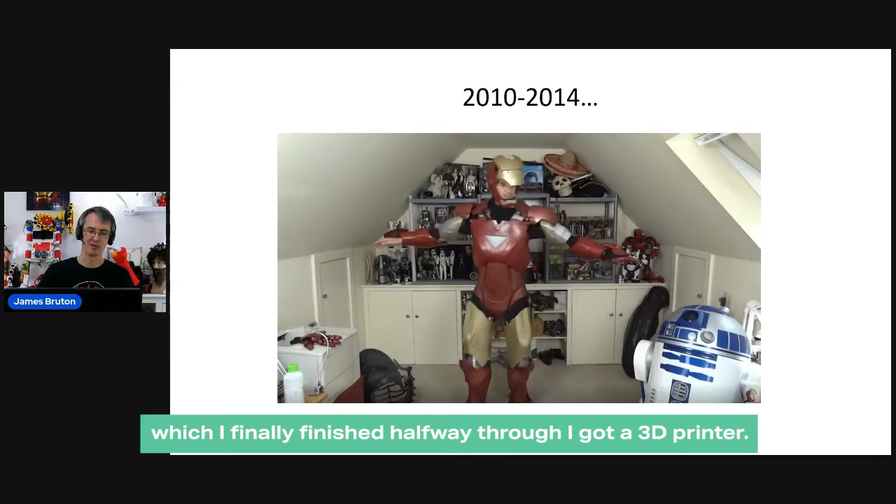That was mainly because I'd stop for 3 months at a time and not get on with it. I basically made one suit, then made molds and casts, and made another suit out of it, which I finally finished. Halfway through, I got a 3D printer. Most of it was a manual process at the start.

That's kind of a big legacy for me. There were around 50 videos building that Iron Man suit, and another 50 for another suit I did. After that, I tried to change the channel and do more serious robotics and stuff like that. I transformed away from pop culture, although I still did quite a lot of robotics and characters from movies.

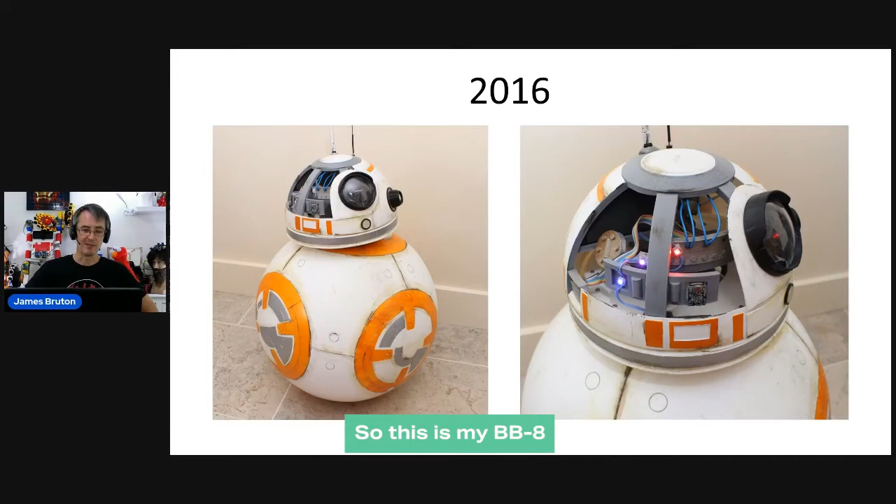Star Wars Episode 7 came out when they really relaunched Star Wars this century, with the character BB-8. This is my BB-8 that I built, and I made the head a cutaway version, the same as the Star Wars Episode 7 visual dictionary. It was functional. I actually did 3 versions, so I kind of saturated YouTube with building BB-8s.

There was an event in 2016 at Excel London called Star Wars Celebration Europe. I think they do it every year, apart from through the pandemic. Last year was Anaheim in California, and I think next year is back in London again. At the 2016 one, they revealed how they made the real BB-8.

In the movie, there were 7 puppets that they control with sticks and various puppeteering rigs. Some were static, some were on motion control rigs. But they also had the real BB-8 that was rolled out at Star Wars Celebration the year before, where they rolled it out on stage and everyone thought it was magic - the red carpet droid that they took to all the red carpet events.

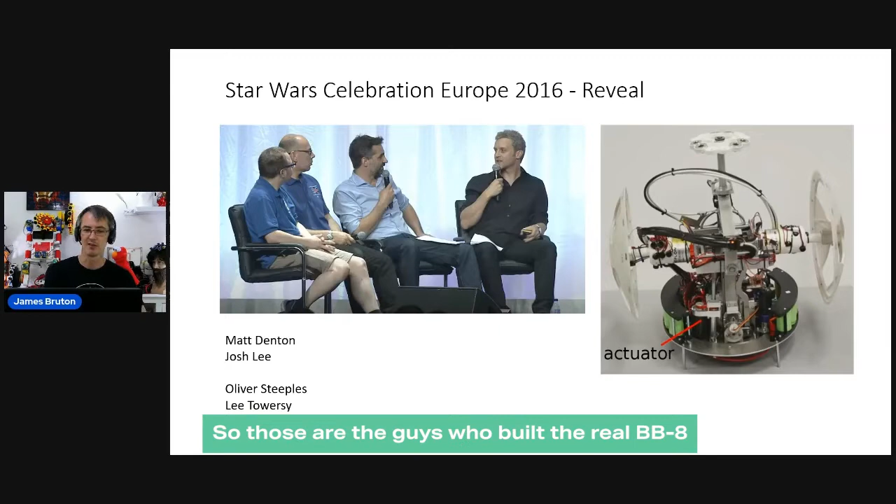The guys on stage on the left are Oliver and Lee, who were originally R2D2 Builders Club members, a fan club. They got asked to actually go and work on Star Wars Episode 7, building the real R2D2. The guys on the right are Matt Denton and Josh Lee from Pinewood Creature Effects - those are the guys who built the real BB-8 that rolled out on stage. At that event in 2016, they revealed how they did it and showed the internals for it.

At that event, I had my BB-8 actually functioning, so that was the only one that actually worked at that event. I was pretty happy that I had it working. This is my BB-8. I didn't have quite the budget that Pinewood had - they had a lot more money than me, being on a Star Wars production.

My main motors cost £2 each, and they were basically windscreen wiper motors that I got off eBay. There's a big piece of lead in the bottom, so it is passively stable. It's got an inertial measurement unit, which it's trying desperately to keep itself upright. It's a 6-axis machine, and it's basically reading the angle it's at and adjusting the motor speeds and positions about 50 times a second to try and stay upright.

So it can rotate on the spot, and it can drive forwards and backwards and lean sideways to steer. It's effectively running on what would be a virtual axle. The head inside is on another lever that moves in another 3 axes. So that's my BB-8. After that, I moved on to some other more serious robotics.

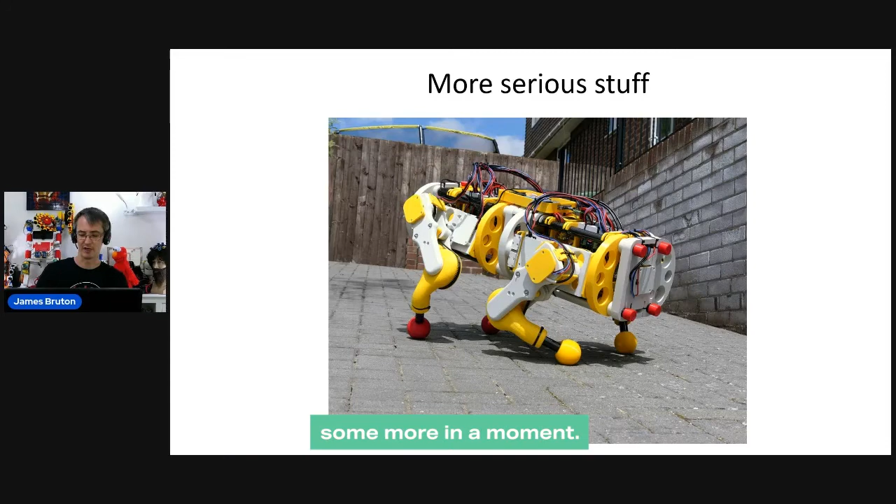I tend to do these themes on projects and then thrash them until I've done them as much as I can. So I did 3 or 4 BB-8s - I'll mention the 4th one in a moment. I also did a lot of robot dog projects - this is Open Dog 2, and I'm going to talk about that some more in a moment. I also spent a year in my spare time learning ROS, the Robot Operating System, which is an open source framework, and this is one of the robots I built.

I did all the hardware, all the microcontroller code to read the wheel encoders and work out the pose of the robot, and worked out how to send those messages as ROS topics and how to use the navigation stack. So it can drive around. It's got a LiDAR on the front, and it can do mapping and navigation.

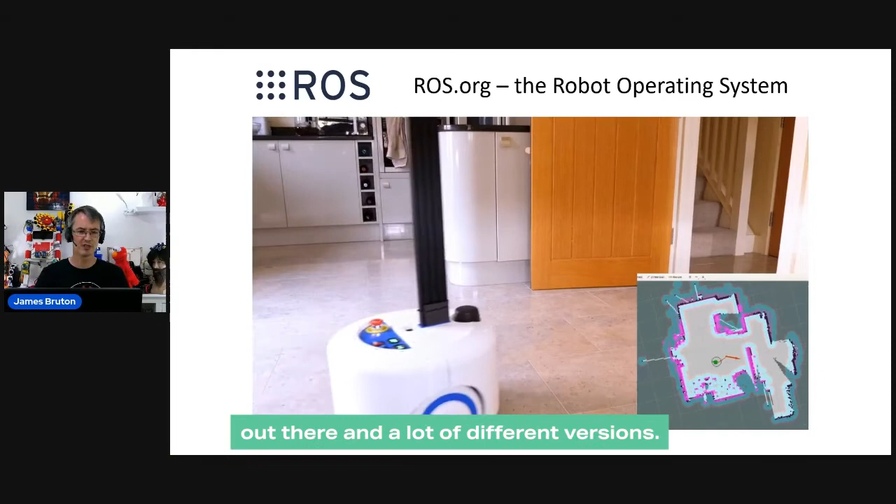This is just running ROS. I didn't actually write much software apart from the microcontroller code, but trying to configure ROS, there's a lot of documentation out there and a lot of different versions. So I ended up buying another ROS robot and looking at various examples.

But nonetheless, it was me trying to get away from dressing up as Iron Man. I mean, ultimately, I don't want to dress up as Iron Man till I'm 65 and retired. Robert Downey Jr. has done all right, but...

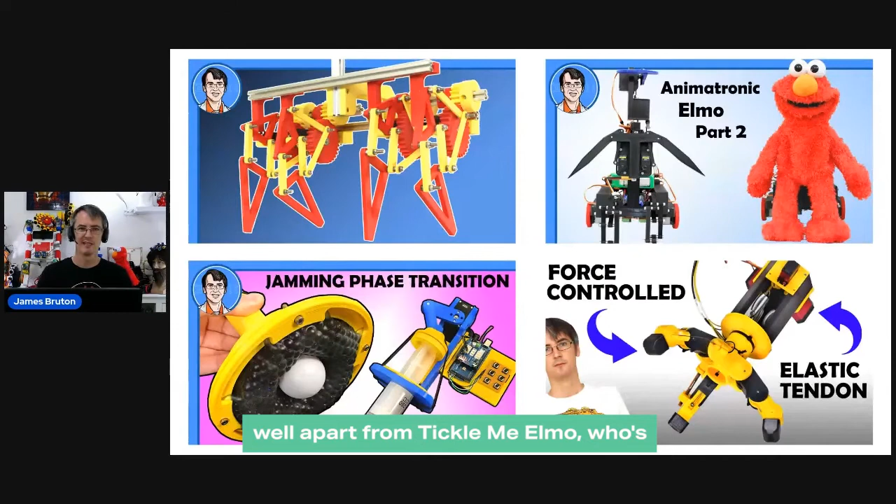I thought I'd move on to some more serious stuff that I was capable of. In 2020, I pretty much didn't do any pop culture, well, apart from Tickle Me Elmo, who's peering over my shoulder. Most of it was serious robotics, so things like force-controlled elastic tendons. The top left is a dynamically balancing Strandbeest, and various other projects.

And this is quite relevant in trying to transform the channel, and I'm going to talk a bit more about that in a moment. The only reason I would do pop culture is if a big brand came along and said, we need a droid from Star Wars, please.

So this is Colin Furze, who's got I think 11 million subscribers now, who builds crazy machines and stuff with lots of fire in. eBay asked us to do a Star Wars promo, and they licensed Star Wars Episode 8 from Disney.

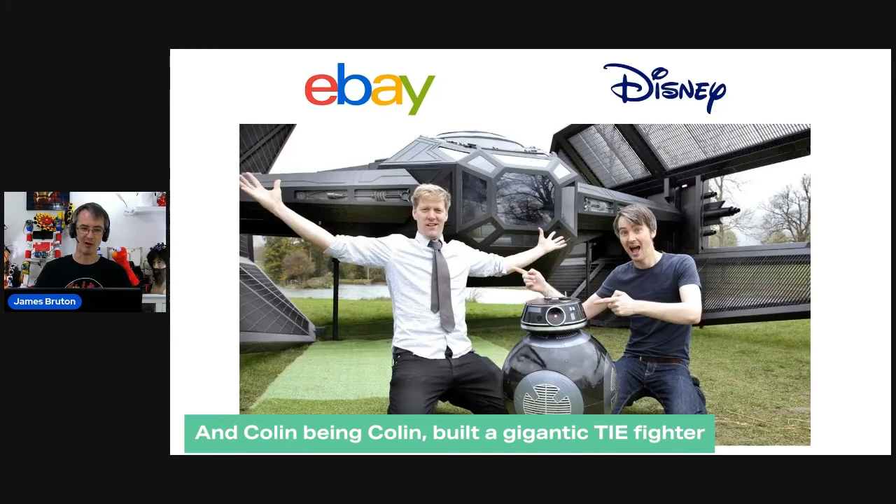So I built another droid, which was BB-9E, which was like the bad BB-8 that's in Star Wars Episode 8. And Colin, being Colin, built a gigantic TIE fighter, which is behind us, out of steel. And that's Kylo Ren's TIE silencer. It didn't fly, but it would have been cool if it did.

Anyway, it's a big production with a catering truck and four camera guys and a drone operator and health and safety and the CEO of eBay UK and Disney licensing on site. Some kids, they surprised some kids basically. Oh, official Disney stormtroopers, the whole thing.

There's quite a good, it was a Christmas video. It was quite a good feel.

Then it happens again for Marvel Infinity War. So here's me and Colin again with a box. And then inside the box was a giant Hulkbuster that broke out with a pneumatic punching fist.

My job was designing the cosmetics to make it look like that. It all had to be rolled out of steel, which can only be rolled in one axis. At least that's all Colin could do. And it still had to be approved by Marvel in the US.

So I had to do all the CAD for that and work out how to unfold it onto flat sheets. And I 3D printed the helmet and did all the electronics and control, which had to be risk assessed because it had fire coming out of it, which meant it all had to be operated on a 30-meter cable and no one was allowed near it.

Then Paramount asked me to build Bumblebee, the real Transformer. This one I did on my own, but I had to employ someone to help me, and we built the car as well. So this is a life-size Beetle replica.

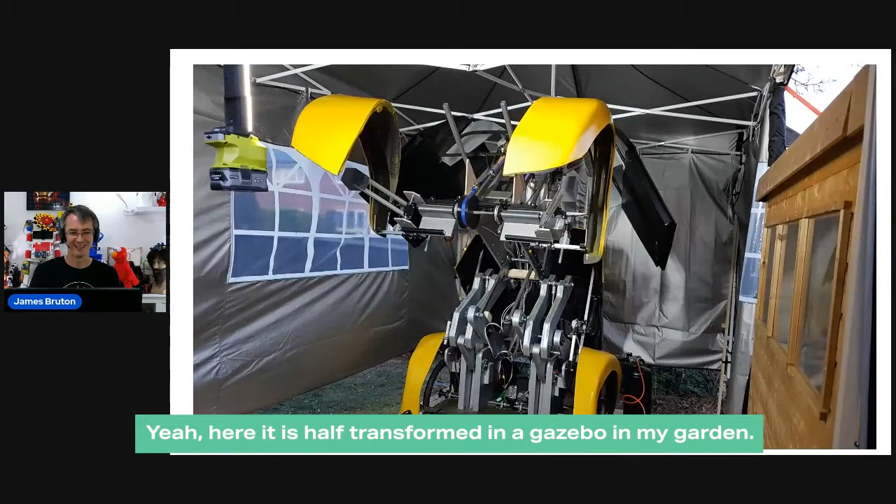Yeah, here it is half transformed in a gazebo in my garden. And here is the thing transformed.

And we basically set up a shoot in a garage where some customers came in for a free tyre check. And then we transformed this thing in front of them. Most of the British public are really bad at reactions.

There was one guy who saved the day who was like a bit crazy. If it had been in America, it would have been fine.

So some parents brought their kids in as well, and then they tried to interview them afterwards, sort of like, was it exciting? Yes. What did you think of it? Very nice. So anyway, the video was okay in the end.

Then we shot our own video pranking a fake traffic warden, which is quite good. You can check that out on my channel.

But most of the time, I tried to do serious robotics and not pop culture unless someone had a budget. So on that note, I'm going to tell you why I deleted 100 million views from my YouTube channel. So you'd think videos with tens of millions of views on are a good thing.

But I kind of changed what I did. The problem I had was what some people described as a good problem to have.

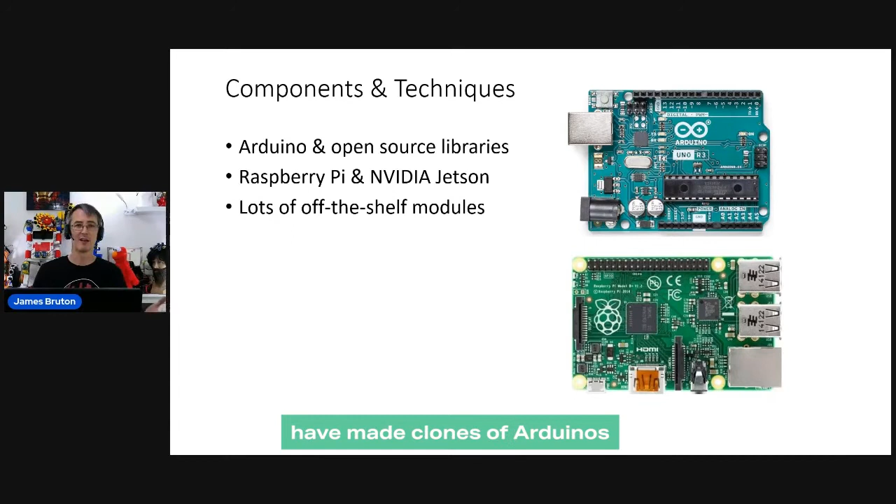There are lots of modules and lots of libraries. The whole Arduino ecosystem is really good because lots of people have made clones of Arduinos, and they've made loads of clones of modules. There's loads of cheap stuff you can get on eBay from China, and there's pretty much always an easy way to interface it. So most of my code is reading from one library, maybe even processing it with another library, and then pumping it out to some other physical module that uses another library.

So I don't really have to be very good at software development to make things like balancing robots and transformers that can transform and all that good stuff. I do make physical things, so I do a lot of 3D printing.

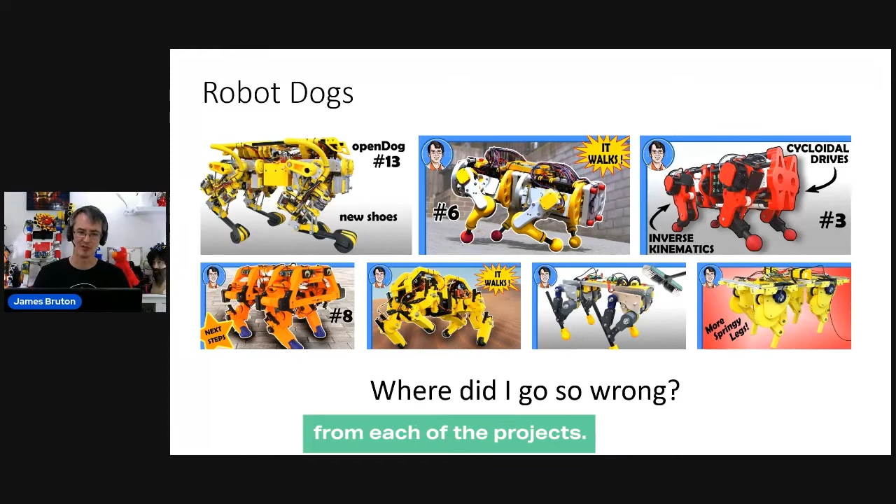I built quite a lot of robot dogs, as I mentioned, and I kind of saturated YouTube for robot dog projects. Here's some pictures, the thumbnail images from each of the projects. Where it says #13 that's part 13 of the series, meaning there were 13 videos for that one. Across the top is OpenDog1, which I didn't know was OpenDog1 at the time because it was the first one, then OpenDog2 and OpenDog3. Along the bottom are two mini dogs I built, two test dogs, and another test leg. So that's 7 or 8.

But where did I go so wrong? Why did I make so many? I guess Boston Dynamics made several versions too, and probably have a lot more stuff that hasn't been made public, with a place where there's lots of test legs. So I guess 7's not too bad, but I'm just one person in my spare room.

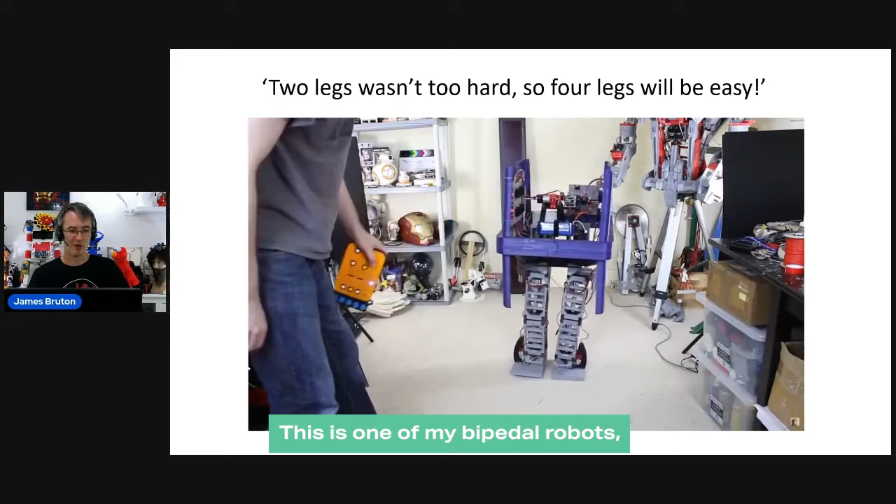I started with bipedal robots. This is one of my bipedal robots, which is a Gonk droid from Star Wars, one of those droids that walks around loading X-Wings in the back, basically a box with someone's leg sticking out of the back.

So I thought I'd make one for real. It's not too bad actually for something I 3D printed and made with some Arduinos. I think the motors in this were £10 each. So I thought, 2 legs isn't too hard, 4 legs will be easy, won't it? I'm actually going to play that again because it's quite a good bit of footage.

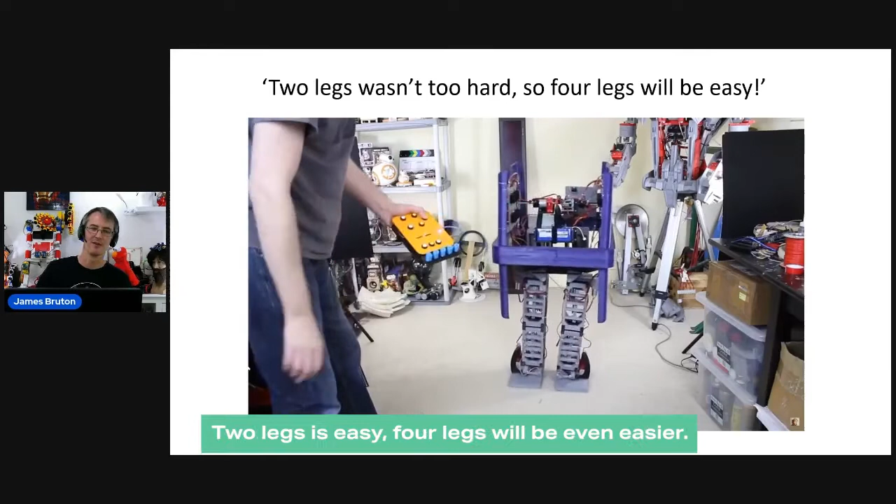I made another one as well, slightly bigger, with some metal parts and better actuators. 2 legs is easy, 4 legs will be even easier. And that's where it started.

OpenDog version 1, in brackets. I'd just got my CNC machine, so I could cut aluminium, and I thought I'll make it really substantial, cut loads of aluminium plates, with lots of extrusion in it as well. All the metal is aluminium pretty much, apart from the steel ball screws, and all the yellow is 3D printed. Aluminium's a lightweight material, unless you've got lots of it, then it's not that light.

This robot was driven with screw drives and brushless motors, so the screw turns and a nut goes up and down. You can just see the screw drives in some of those pictures. Those screw drives are steel, and the motors are full of magnets and copper wire. It was a fairly hefty thing.

I kind of planned it, as far as the inverse kinematics. The previous walking robot didn't do any maths really worth speaking of, it just basically fudged some numbers and tried to add a bit onto its feet, dynamically balancing by measuring the angle. This one I worked out inverse kinematics.

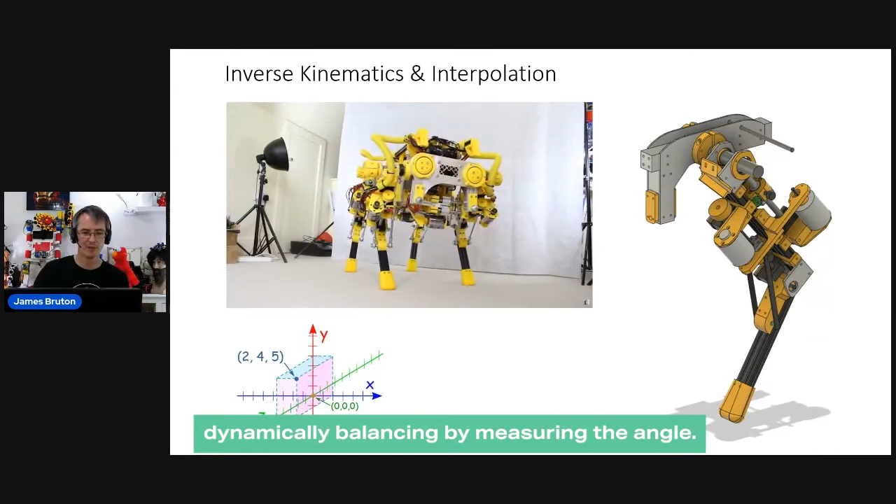Inverse kinematics is where I could position a foot in XYZ Cartesian coordinates, basically coordinates at right angles to each other, like the little diagram in the bottom left. Then the complicated geometry is reverse calculated so I can position that foot and move it in straight lines, and it works back all of the joint angles.

There's 3 joints per leg: one at the elbow, one at the shoulder, and one at what I've called the hip, which is the outward moving motion. I actually built the remote, did all the electronics, and calculated all the inverse kinematics to check I could do the maths to get to the actuator length on that screw. Then I tested it by moving the CAD, measuring the angles, moving the control stick, and seeing if the results were the same.

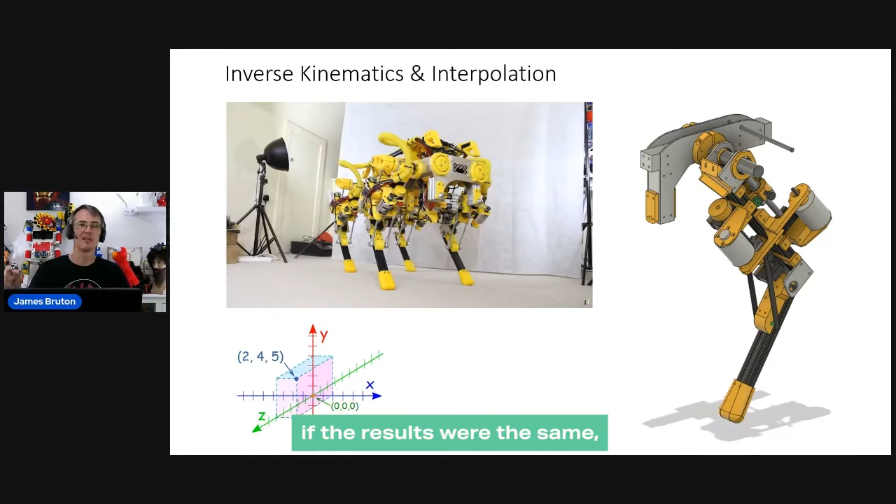And then I knew I could build it.

The problem with this one was it was very rigid because of these screw drives, which you can't push back. There's no compliance and there's no springs in it. So it did walk along, but as you can see, it's not Boston Dynamics in any way. It was very heavy as well, and sometimes broke under its own weight.

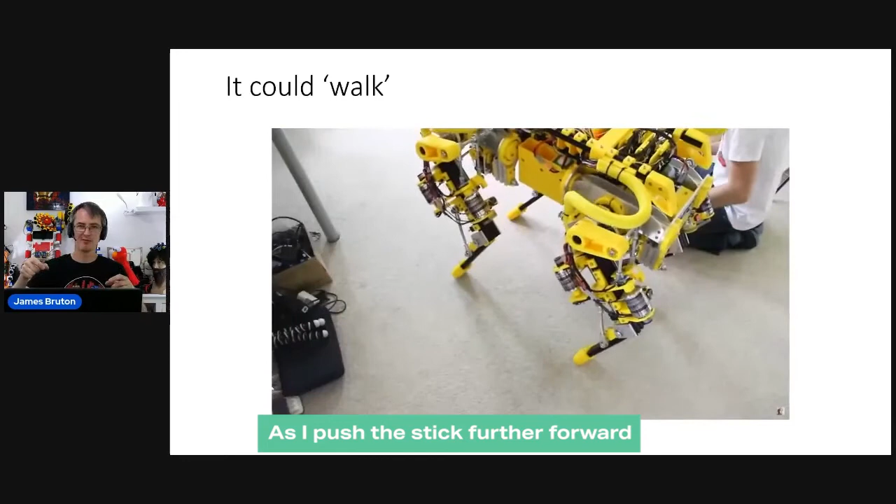So it could kind of walk. It did the inverse kinematics. It could move the feet between positions. As I pushed the stick further forward, the stride would get bigger, essentially. But obviously you can see it's a rather slow, cumbersome thing.

There's some flex in it as well, which isn't very ideal, and there's no compliance. So if a foot hits the ground, it pushes it, and it pushes the whole dog, and that's why it kind of teeters along as it goes. I had to buy a crane to pick it up because I couldn't pick it up anymore, and sometimes the joints broke under its own weight.

And I hadn't really planned any further than the inverse kinematics and whether it would physically move where I wanted it to, which was a bit of a mistake, really. But there we go. So then I heard about this thing called quasi-direct drive.

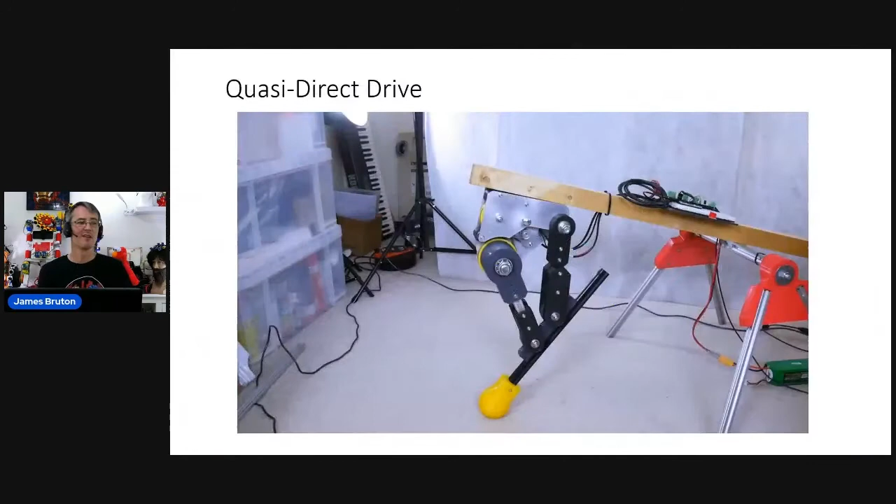Quasi-direct drive is where you've got a low reduction, so you have a powerful motor. Instead of having a screw drive that turns around lots of times to move the nut down, you've got maybe a 1 or 2 stage reduction, so you can push the leg back and you can drive the motor back.

So here's my test leg. I eventually made 4 and put them on a dog and hit it with a broom. This is moving between 2 positions, but you can see if I push it, then it will comply because the motor can be pushed backwards.

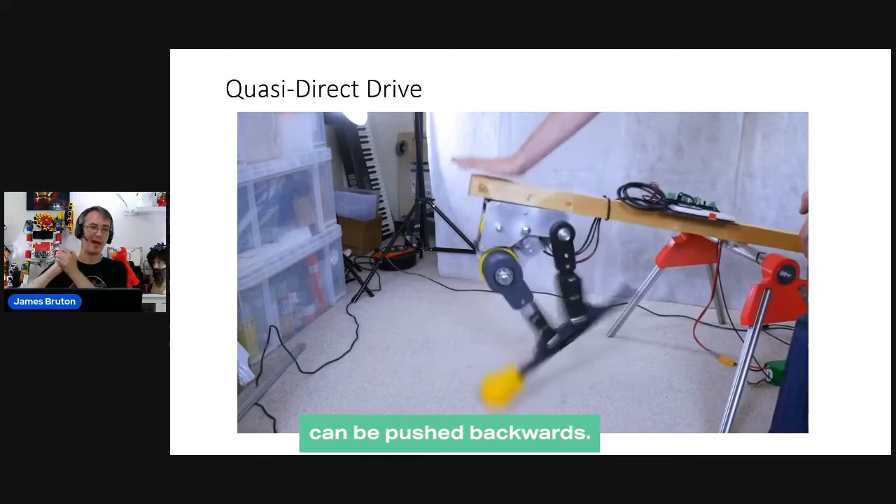I then did a rather clever thing, which was the motor's got an encoder on so it knows where to position it. So I can look at that encoder, I drive it to one position and then see where it actually gets to. The difference must be the force that I'm exerting on it. So if I'm pushing it to a position of 20, but it's only getting to 10, it means it's hitting something and it can't go any further.

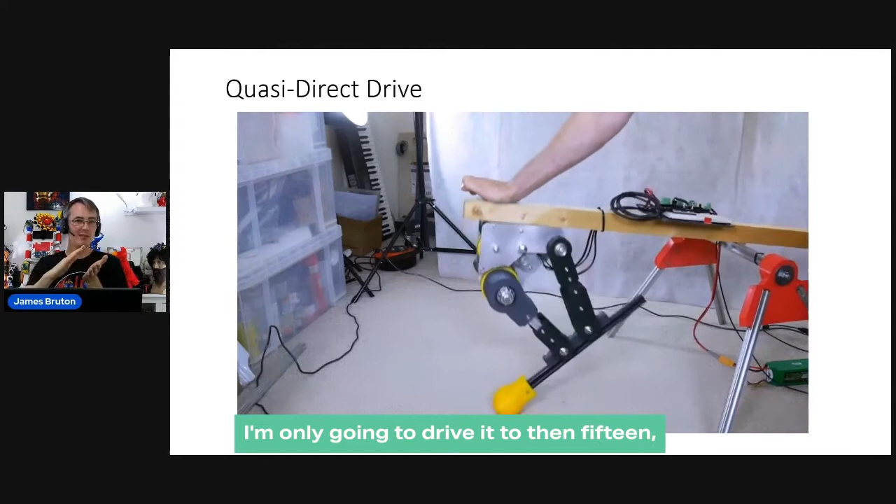Then I can use the difference of those 2 positions - basically the difference is the force. So in that example, I could say, well, I'm only going to drive it to then 15, which is splitting the difference, which is what's happening now. So when I push it, it complies even more. So then it's effectively force controlled.

Excuse me just a moment. Yeah, so I'm just recovering from COVID and I've got hay fever, so I'm just going to drink all this water.

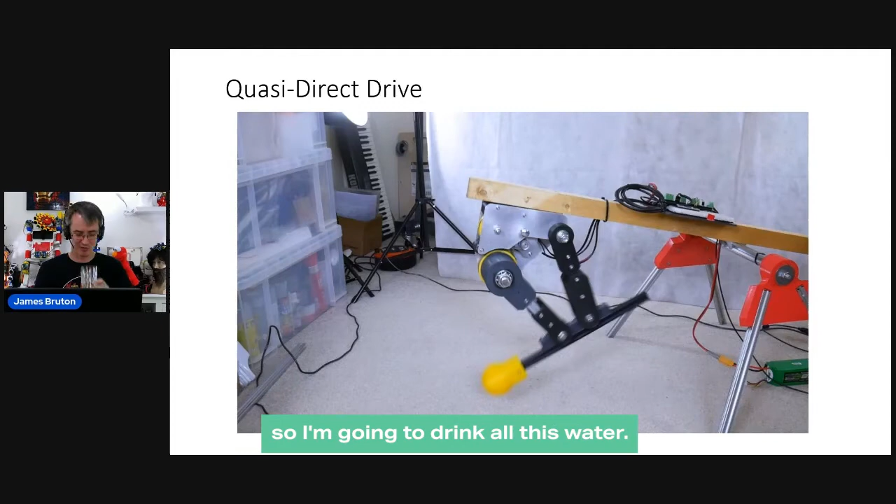So essentially what we've got is a force controlled joint. And then I can move on.

And I made another test leg, test dog, in fact. This one has rubbery feet, and I made all the mass really high up, so it's really hard to balance on its own. So without any stability control, it falls over.

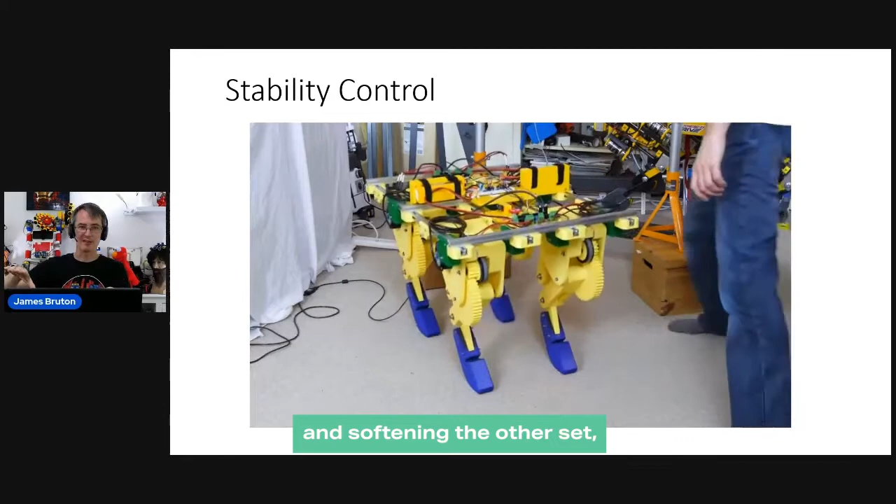And now I'm doing the same thing, but I'm using an inertial measurement unit to measure the angle side to side. And as it tips over, I'm firming up one set of legs and softening the other set. That means it's dynamically controlled and it balances and it works for much longer.

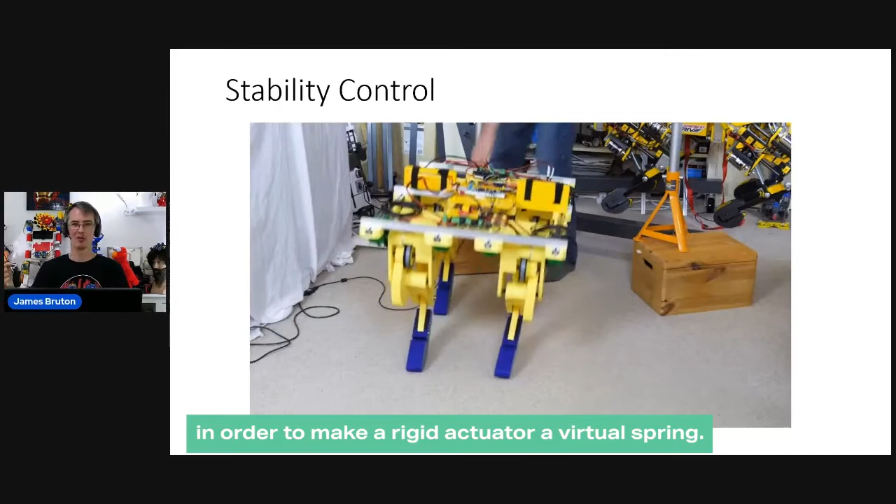That only works with a back drivable mechanism so that we can measure the difference between where it should be and where it is. We could put load cells in the legs and things, but then you'd have to read that fast enough and control the motor speed in a very fast loop in order to make a rigid actuator a virtual spring. With this one, the spring is always a spring, even though there's no springs, because the motor is back drivable and the current is trying to hold it in position, the motor driver applying current. So basically, we've got a very simple mechanism that we can easily write some code to make a dynamic leg.

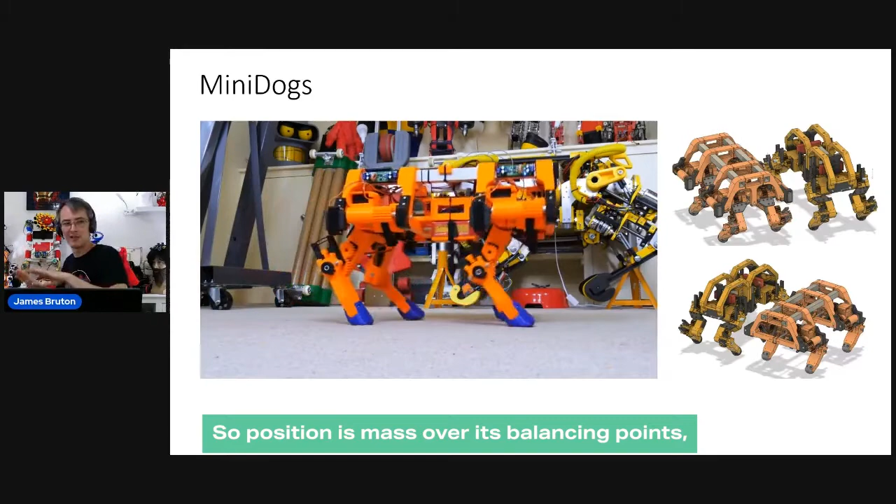An interesting thing happens when you make things smaller, which is that they're not too bothered about being rigid. There is some flex in the legs, but there's no back drivability and no springs. But because there's less mass and it moves quicker, it's much more forgiving, and mainly the carpet's a bit squashy, which acts like a spring. Because it's not a two-man lift anymore, it worked okay. This was really just to check that I could actually make a dog that walked. It does have some stability, moving its feet backwards and forwards to position its mass over its balancing point, but it's pretty rudimentary.

So I was quite happy that I'd made a dog that walks. It only just had powerful enough motors to hold itself up. But I really wanted to make one the size of Spot Mini, so I then moved on to openDog V2.

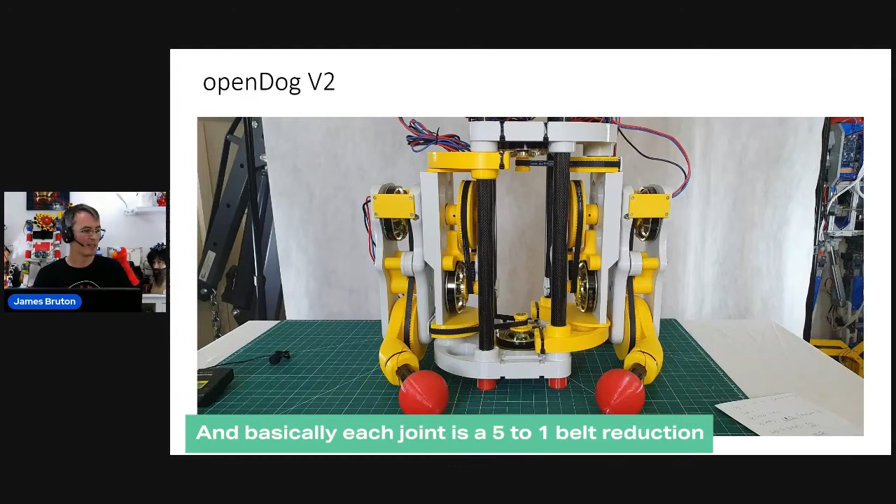This one has a low reduction. I use really powerful motors. The shiny pieces in there, there's 6 of them, are the brushless motors, and these are drone motors. Each one's got a belt reduction, which is a 5-to-1 reduction, so we get 5 times less velocity, which is fine because they're drone motors that are really quick, and we get 5 times more torque. Basically each joint is a 5-to-1 belt reduction, and that's it. Lightweight and really simple, and the immediate result was it was much more agile.

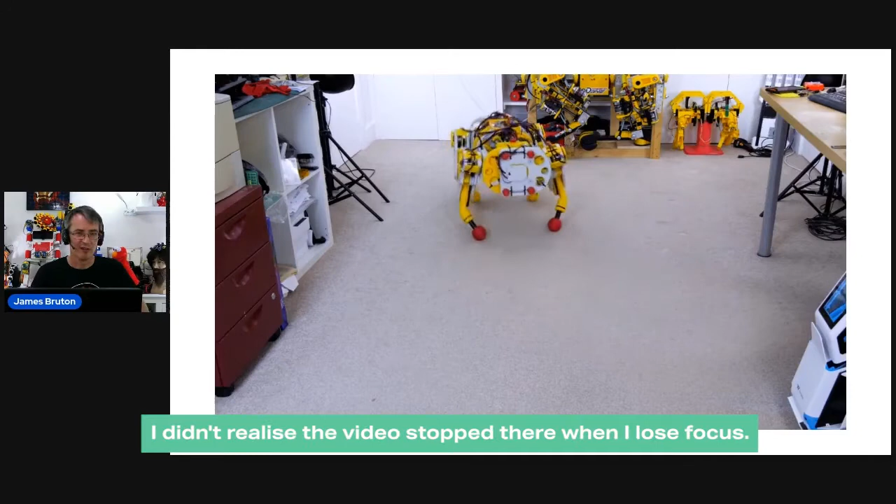Oh, sorry, I didn't realize the video stopped there when I lose focus.

So this is openDog V2, which works okay, right? It looks pretty good. It's relying on its motors being back drivable to make a virtual spring, so any impact on the legs absorbs the impact. There's no dynamic stability, it's just moving its legs on fixed timers to fixed positions. The stride gets longer as I push the stick forward, but apart from that it's all fixed. It's got no intelligence, it's blind basically.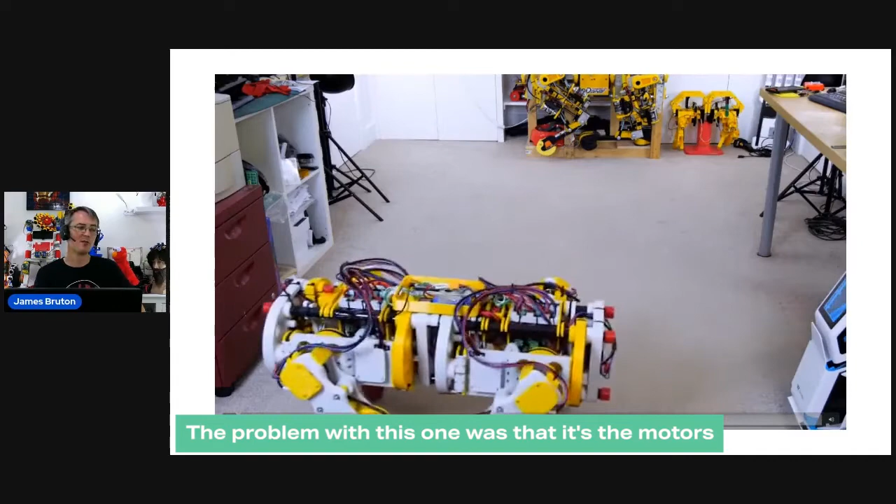The problem with this one was that the motors with those 5-to-1 reductions - let's just go back to that slide - burn up power just standing there, so much that the motors get too hot to touch, and you can smell the enamel burning off the motor windings. Mainly because there's only a 5-to-1 reduction, so that motor's really trying to hold its position. Not really enough torque at all.

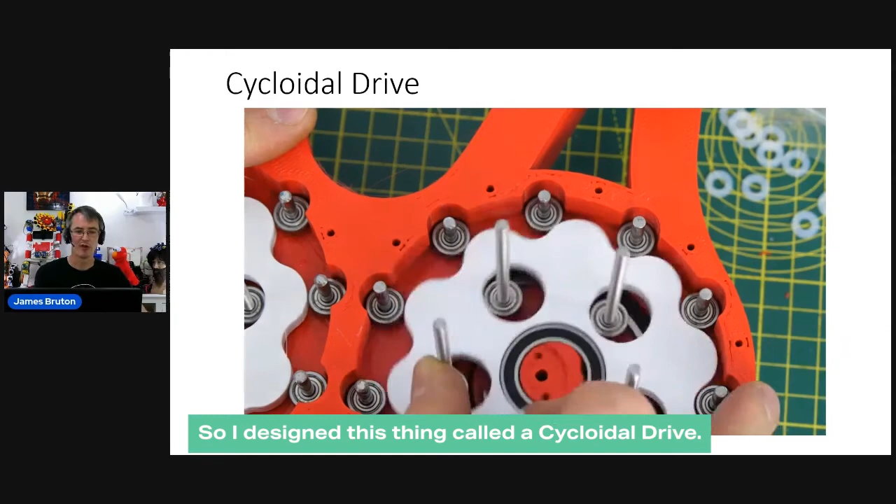So I then wanted to move on to a 10-to-1, but that would make the pulleys twice as big, so it's time for another type of reduction. I designed this thing called a cycloidal drive. I didn't come up with the concept for this, but I designed it so it could be 3D printed, and it can be printed in PLA, which is basically the most basic 3D printing material anyone's got access to.

So this is like a strange wobble that's a reduction. The piece I'm turning in the middle there is the output, and the piece turning around much quicker in the middle of that is the motor on the back with this cam. So this is a 10-to-1 reduction, and there are 12 of these in the next OpenDog.

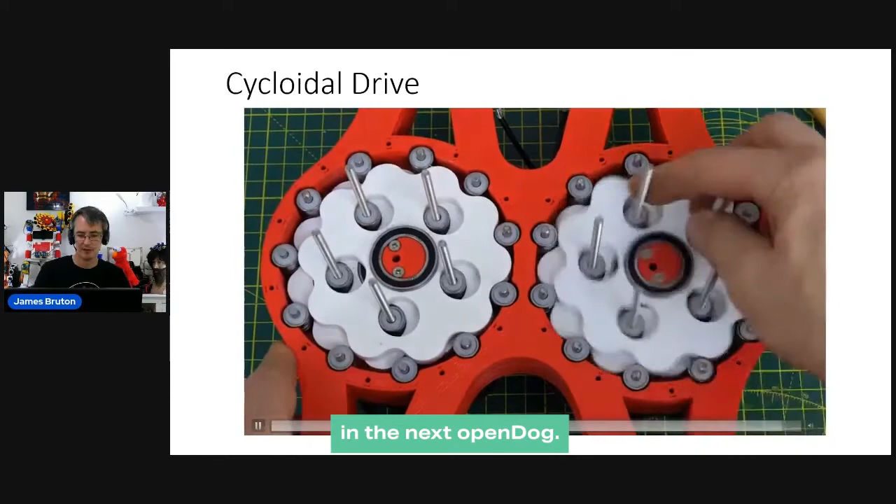So to test this and make sure it'd be robust enough, I did this, which is one of these drives on a wheel - yes, pushing me on a skateboard for about 3 miles. It's not exactly a speed machine, but it did test robustness of the drive. Still all the parts are PLA. As you've seen, there's a lot of bearings and metal in there, but it's basically off-the-shelf nuts and bolts, and a lot of ball bearings, which are those metal parts, which help it run smoothly.

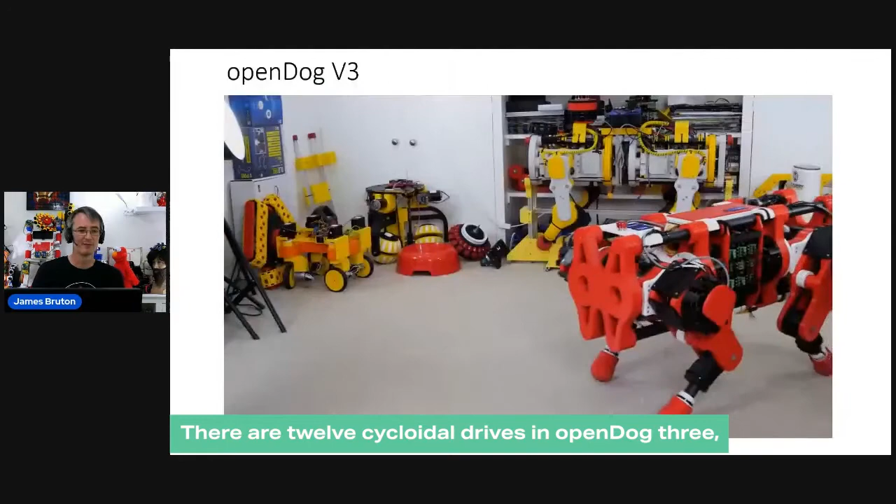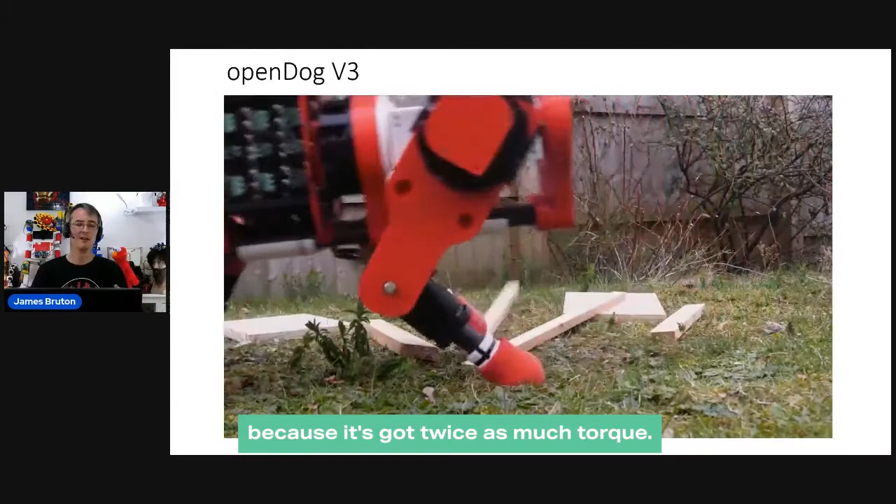There are 12 cycloidal drives in OpenDog 3, which means I think there are 384 bearings, including the ones on the other side of the joint and so on. And as you can see, this is much more robust. The 5-to-1s in OpenDog '2 were burning up power holding themselves, but this one can run on much less current because it's got twice as much torque. It is heavier - OpenDog '2 was about 22 kilograms, this one was about 30 kilograms, mainly owing to all the extra metal. It's got brushless motor drivers, there's 6 ODrives, which are open source, and I tried to make everything as open source as possible.

So those are the green boards you can see on the side. There's 6 of those, each one controls 2 joints. There's 3 joints per leg and 4 legs, which is 12. So 12 cycloidal drives with all those bearings, 12 brushless motors.

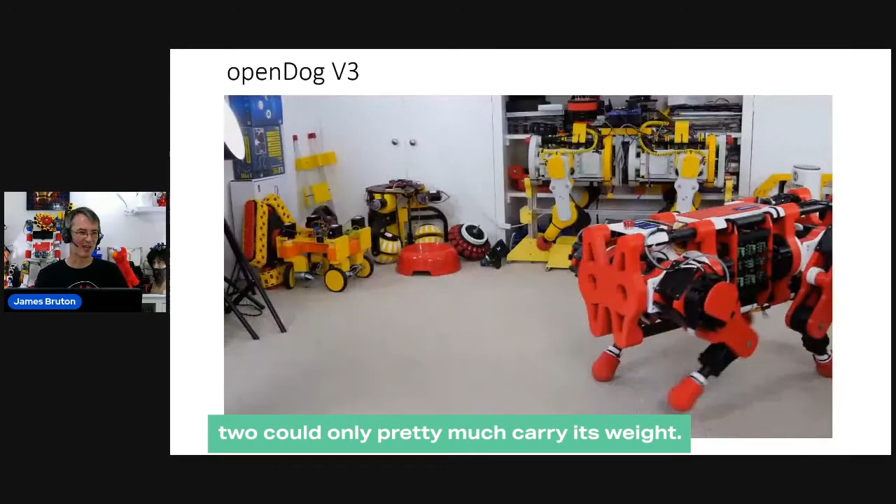But yeah, it's a lot more robust than OpenDog2, which could only pretty much carry its own weight. This one I can kick, and it's pretty resistant to it. It's still not intelligent, doesn't really have any dynamic control, but its legs are a virtual spring with all that holding power, so it just keeps trying to walk if I try and stop it, and it will clamber over objects and pretty much stay upright.

So the one thing I did with the Quasi direct drive was that virtual, or force control joint. So reading the difference between where we are and where we should be, and then driving partly to that position to make it much more compliant. I haven't done that with either of these. OpenDog2 didn't have enough power to reduce the power to make it more compliant.

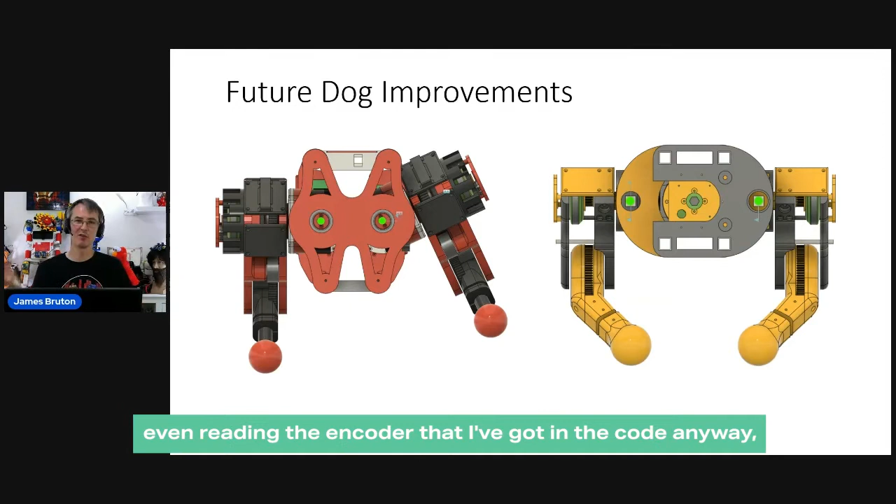So I still really need quite fast processing to read the force, even reading the encoder that I've got in the code, because I'm telling it to go to that position and knowing where it is so I can control it. To read that back and still adjust the motor still needs quite a lot faster processing than I have. The main thing that's slowing me down is writing to all the motor drivers over serial, because there's 6 of them. I really need CAN bus to do that.

Ideally, what I would need is a different dog structure. And the reason it's structured like this is because the cycloidal drives are right on the pivot point of the leg, so the leg has to be further out to clear that shoulder motion. Whereas with OpenDog2, there's belt drives, which means the motor isn't in the way because the belt moves the axes some distance apart. So ideally, I need an OpenDog4 with a cycloidal drive with a 10-to-1 reduction, then maybe a further 2-to-1 to a belt to get the joints in the right position, and the legs with the feet underneath the shoulder joint. So that will be the plan for OpenDog4.

However, my product is content. People are pretty bored of seeing my robot dogs, so views aren't what they were. Simpler projects have got better views, so probably won't be an OpenDog4.

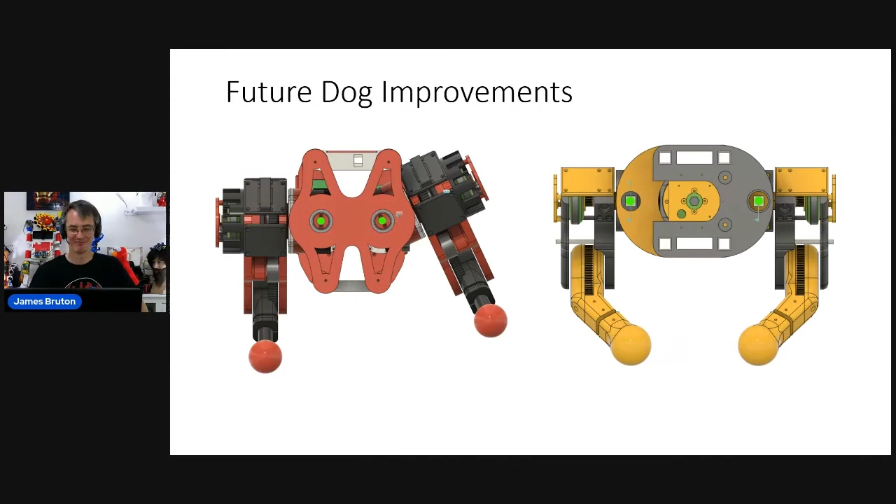Right, the next section's about more dynamic robots. I mentioned both with BB-8 and with some of the dogs, they've got inertial measurement units in that measure the angle, and typically that's the sort of thing you have in your phone that knows which way up it is, so it can turn the screen round, or you can play a driving game. It's also what's used in segways and hoverboards and balancing robots.

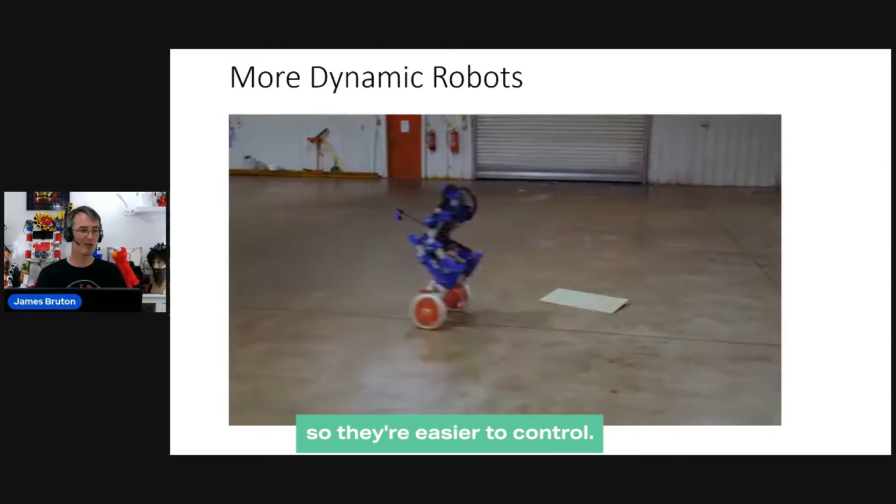So I've done quite a lot of projects which are balancing robots. This is my Sonic the Hedgehog themed balancing robot, which is about 4 foot tall. It's pretty heavy. Heavier things fall over more slowly, so they're easier to control. Again, it's got brushless motors and ODrives, and it uses an Arduino, reading the same inertial measurement unit.

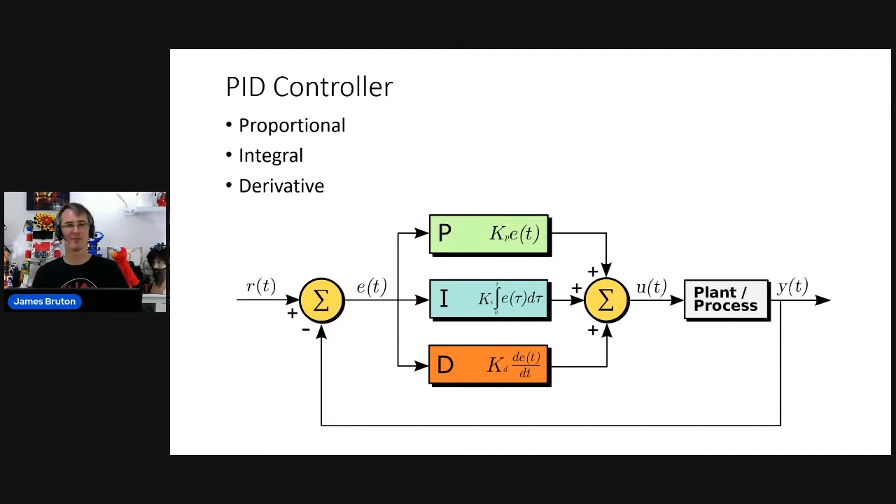The thing about balancing robots that makes them work is something called a PID controller. I didn't write this, there's a library for it, which is really useful. A PID controller is basically some maths that takes the input and changes the characteristics to get the output. And there's 3 terms: proportional, integral, and derivative.

Proportional means as the robot leans more, the wheels get faster, which is what we want, and so it drives in that direction. However, that's not enough to actually make it balance. I'll come onto integral in a minute, which is the most important one.

The derivative is the tangent of the curve. So if the data is going down, you get a very sharp motion down. It's almost like amplifying it in a straight line, and that will make sharp motions which help to some extent to catch itself.

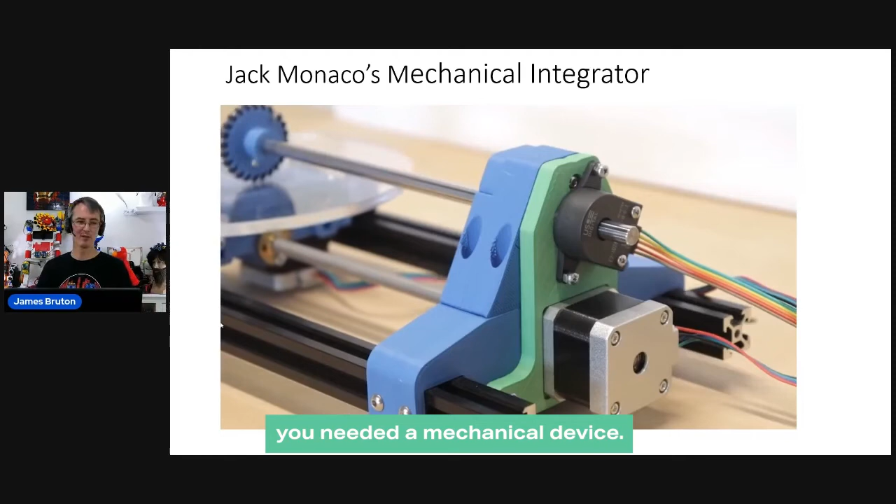But the most important one is the integral term, and the integral is the area under the graph. So this is a clip of a video from someone called Jack Monaco, who built a mechanical integrator. In the olden days before microcomputers, if you wanted to do some integration, you needed a mechanical device. What we've got here is an Arduino controlled machine, which is an Omni wheel moving on a turntable.

So here we can see the input on the left. If it's 0, the output's 0 because the wheel isn't moving. As the function, if the function is a value, basically, so if the robot's leaning over at a constant angle, the output increases to accelerate, and that's because the area under the graph is always getting bigger because it's the area.

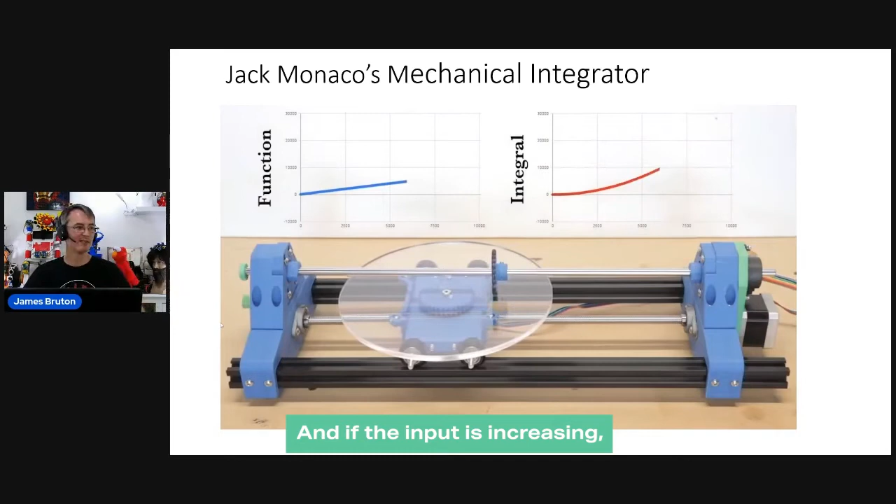And if the input is increasing, then the output increases even more. So basically, with a balancing robot, that means it accelerates to catch itself. We do get overshoot, which is where the derivative is useful to make those short, sharp motions to go and basically compensate. If you turn it up too much, you get lots of vibrations. So all 3 terms need to be tuned.

It's a bit like tuning a camera with 3 lenses so that you get them all exactly right. They could all be in or out of focus, and they all have to be balanced. Typically, we have a high integral and a low derivative, and proportional somewhere in the middle. The integral is so important to making a balancing robot, at least one that moves smoothly.

So I did quite a few balancing robot projects, and then I got a bit obsessed with one-wheel robots. We all know, we've seen unicycles and these personal mobility vehicles. You'll find they always have to keep moving in a straight line, like a bicycle, to stay upright side to side, and they balance like a Segway front to back.

But I thought I'd build some that stand still on the spot on one wheel, or were capable of it. And I used about 3 different methods for this. The first method was gyroscopes.

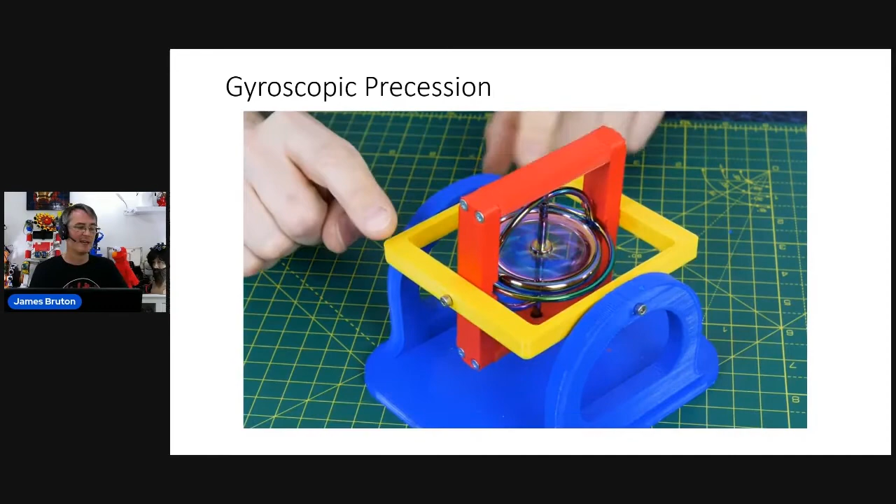So everyone's seen a spinning top, right, that stands up. It only does that if it can spin round. If you lock one axis, it won't stand up at all. So gyroscopic precession is when you move a gyroscope in one control axis, then it wants to move in a perpendicular axis. If you've ever held a spinning hard drive that's powered up and tried to move it, it feels really weird, and that's gyroscopic precession, because it's a spinning platter.

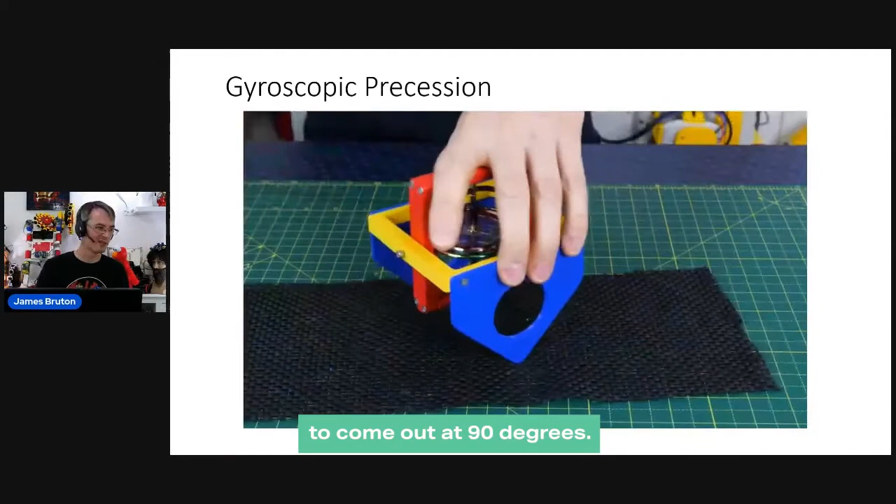That's because the thing is spinning and gravity's acting on it, and that causes the force to come out at 90 degrees. So yeah, locking one axis, it'll balance for a bit, but it won't balance for very long before it falls over.

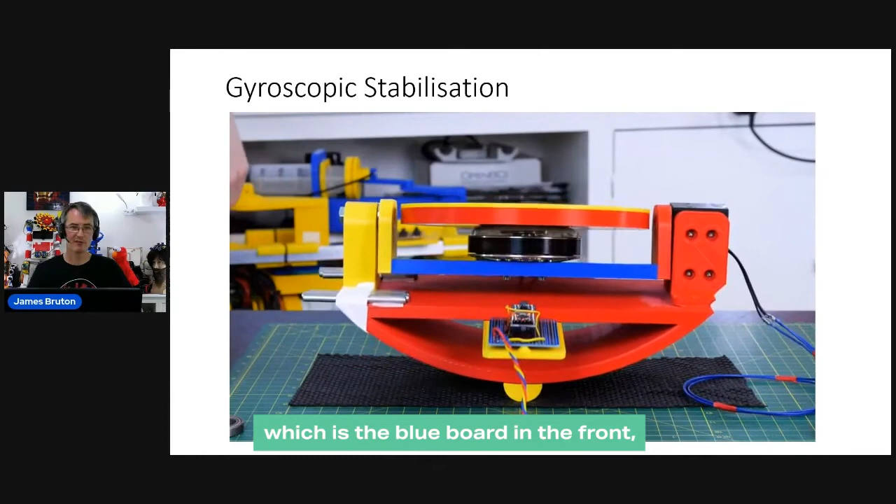However, we can use this gyroscopic precession to our advantage. So here's my first attempt at gyroscopic balancing. I'm using an inertial measurement unit, which is the blue board in the front, and that's measuring the roll side to side. I'm using a PID controller to move the gyroscope in its control axis, which is in tilt, essentially.

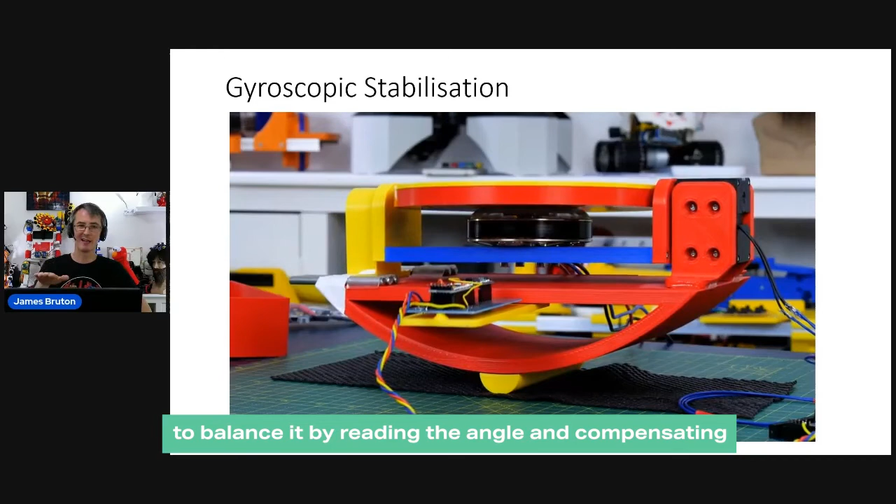And that's exerting a perpendicular force to make it balance in roll. So you'll see some metal attached to one side, and that's to compensate for the servo that's on the other side, which is actually moving that control axis. So this now balances on one side. Without the active balance, it won't work, although lots of people didn't understand why it was so clever. But there we go, that's using that perpendicular force to balance it by reading the angle and compensating and exerting a perpendicular force to the control axis.

And this is nothing new, it's been used commercially. This is a thing called the SeaKeeper, which is almost exactly the same thing, but not made out of 3D printing.

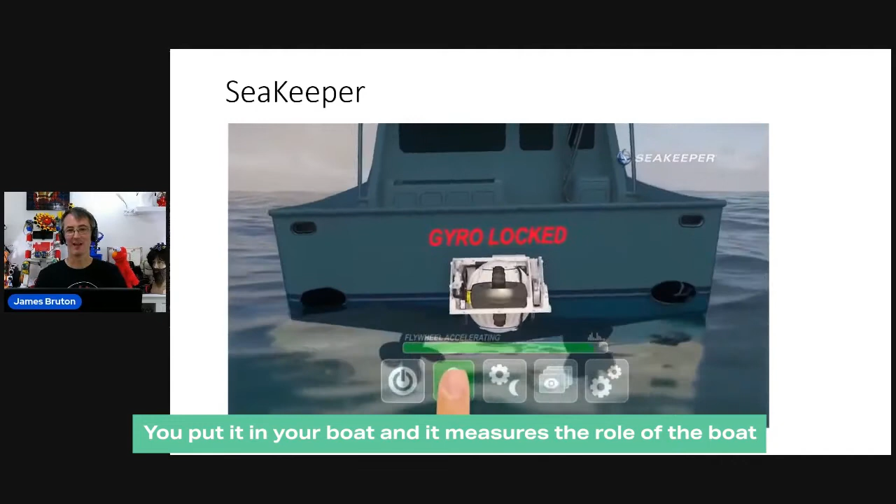It's a commercial product you can buy for boats. You put it in your boat, and it measures the roll of the boat, then compensates in tilt the same way, and stops your boat rolling around. I'm not sure how many people use them. It runs in a vacuum, and it's probably pretty power hungry - I don't know if you need a generator. I assume it's electric, you probably need an engine to produce the electricity to run it, but it does nonetheless stabilize your boat.

There's several videos on YouTube. Apparently they're pretty good.

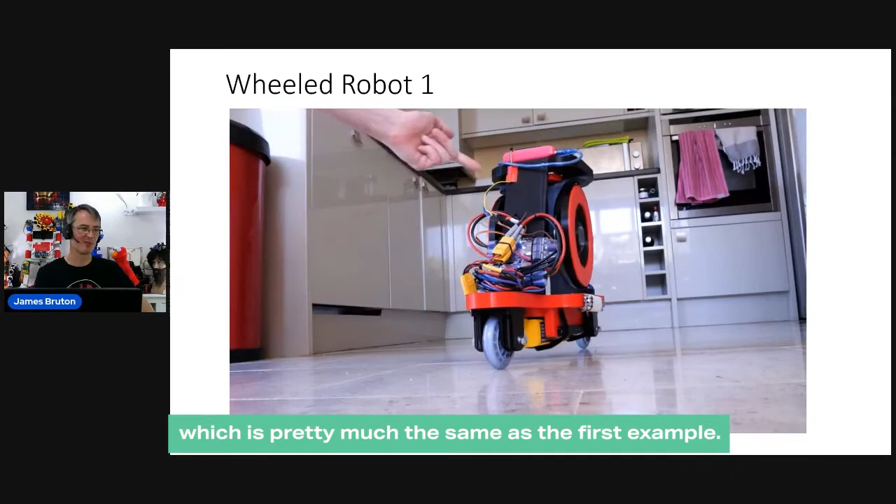So then it was time to make some wheeled robots. This is the first one, which was 2 inline wheels, pretty much the same as the first example. This one's got 2 gyroscopes on each side. They spin in opposite directions and move in opposite directions, so we still get the same perpendicular force, but we don't get any other weird gyroscopic precession, like a spinning top wants to spin round. It's not so important for this because it's got 2 inline wheels, but if it were a one-wheel robot,

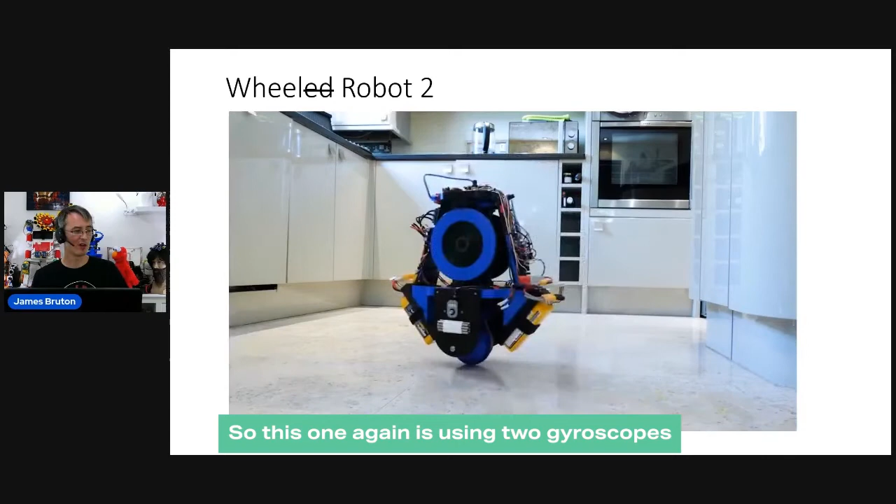then it would want to precess if it were one spinning gyroscope, which would be bad. So this one again is using 2 gyroscopes to compensate for the side-to-side roll, and then it balances front to back like a balancing robot, like a Segway or a hoverboard. The only problem with this was the motors on the back of those gyroscopes - when the gyroscopes move, the motor mass gets offset, and it's like leaning on a Segway and it wants to drive away. But the principle's there. It worked okay.

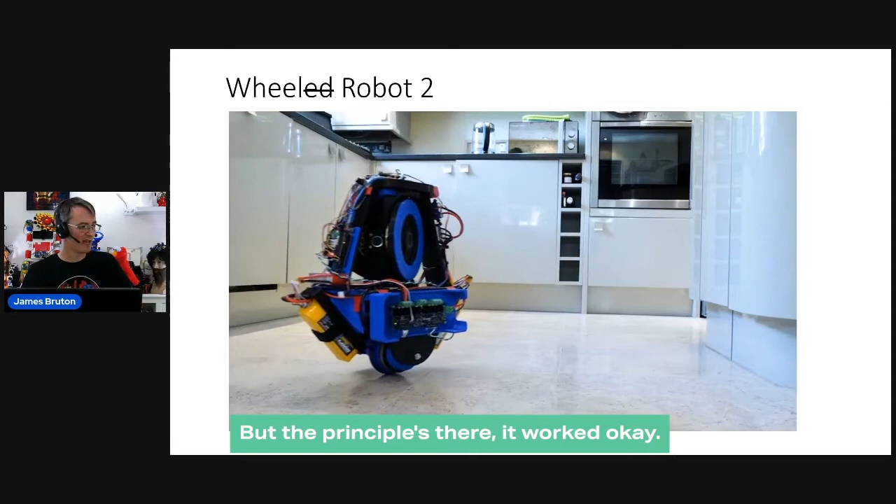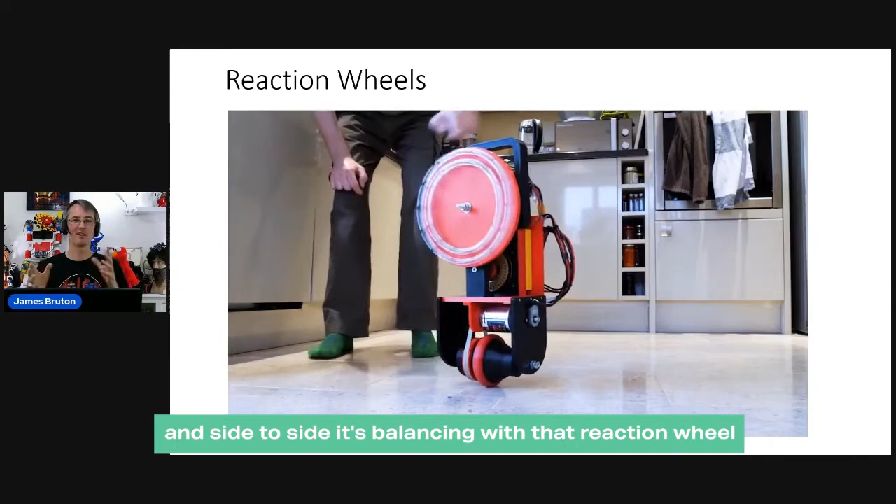I then investigated another thing which looks similar, but instead of a gyroscope, it's a reaction wheel. The gyroscope spins constantly, and we use that perpendicular force from the control axis to balance the robot. This uses a reaction wheel, spinning in either direction around a center point, with the reaction force pushing it back the other way. So again, I put this on a balancing robot. The front to back balance is the same as a normal balancing robot or a Segway, and side to side it's balancing with that reaction wheel to make an equal and opposite force that balances the whole body of the thing.

So these are kind of quite experimental videos. They did okay, 100 to 200K, fairly average views, mostly small stuff I tested on my kitchen floor.

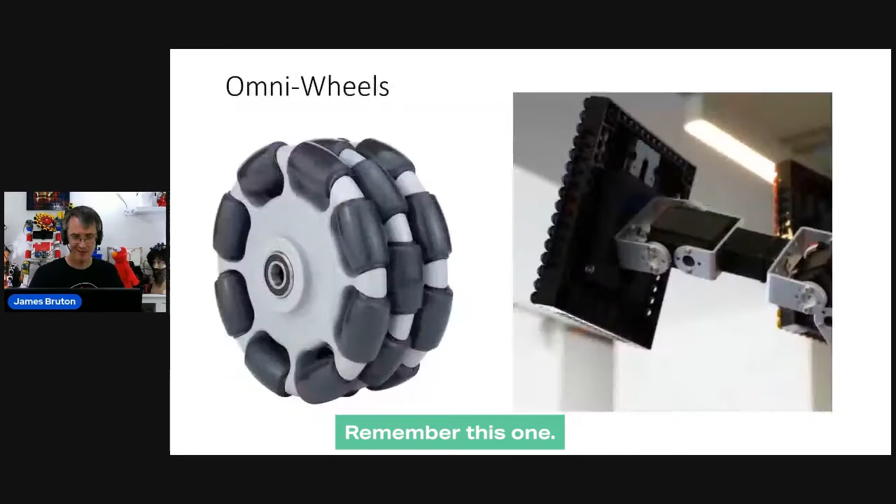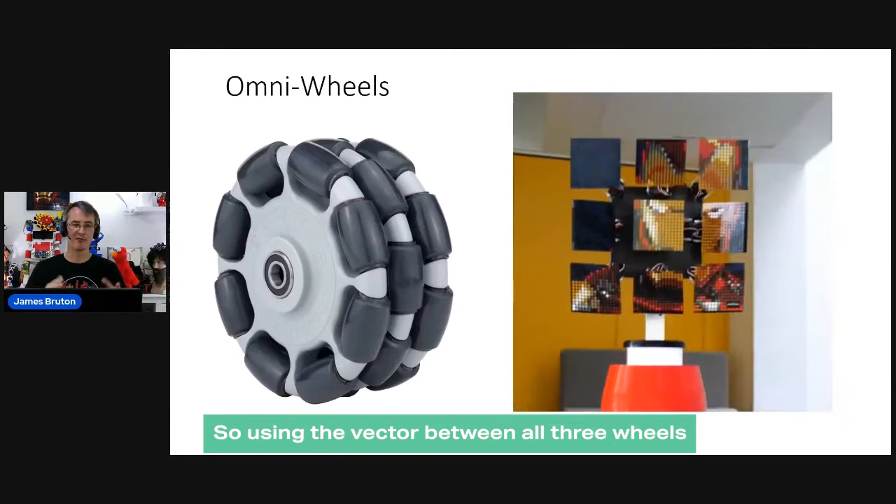Remember this one. An Omni wheel is a wheel with little wheels around it typically, which means it can slide sideways and roll in its normal axis. I did a promo for Lego, which was to promote an Iron Man Lego set, and there's one just up above me here as well, which is Lego studs on 9 tiles, and they wanted a machine that would display this art set. So I made this thing with all these arms with 27 servos that assembles and disassembles it, and it's got 3 Omni wheels. Using the vector between all 3 wheels and controlling the directions and velocity, we can drive in any direction and rotate,

which is pretty special. There are forklift trucks like this - they typically have 4 wheels, but there we go.

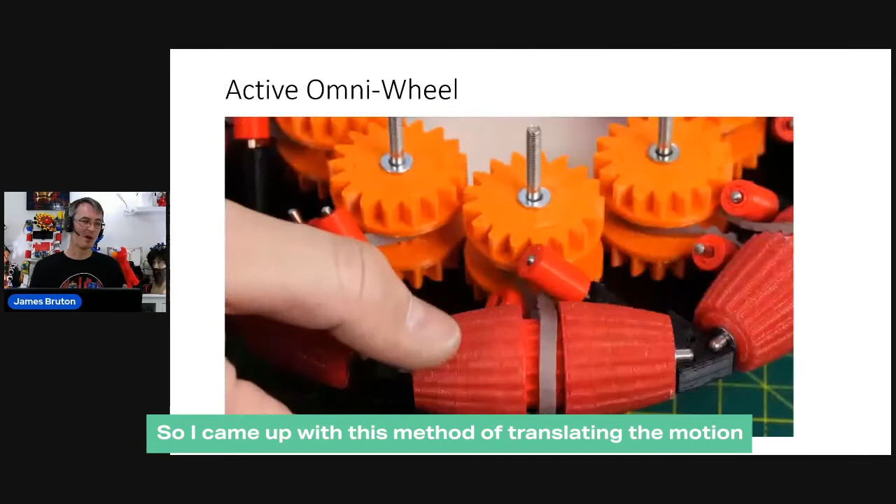So I thought maybe I could make a balancing robot that uses an Omni wheel. But obviously what we'd have to do if we're going to make it balance on one wheel is make all of the little wheels motorized. So I came up with this method of translating the motion, so we can put a motor on either side of the wheel with 90-degree twisted belts. There's 8 little wheels, 8 twisted belts and 8 gears inside, and 1 big gear in the middle. That big gear, when it turns, will turn all of the little wheels.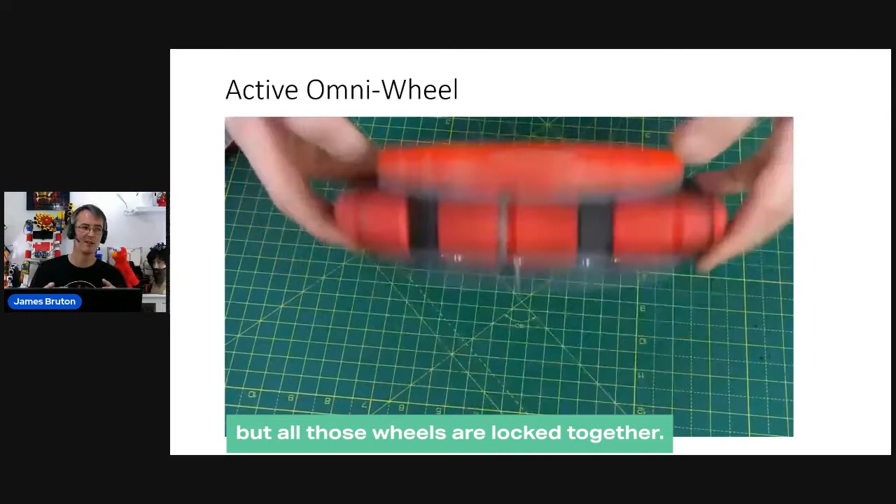There's quite a lot of alignment here with bearings, but all those wheels are locked together. And if we turn it over, you can see the big gear is turning. So the next thing was to put some pulleys on either side.

So if we turn one pulley against the wheel, all the little wheels turn. And of course, if we turn both pulleys, then the whole wheel turns. So we can move front to back, or we can translate sideways. So that seemed to work okay.

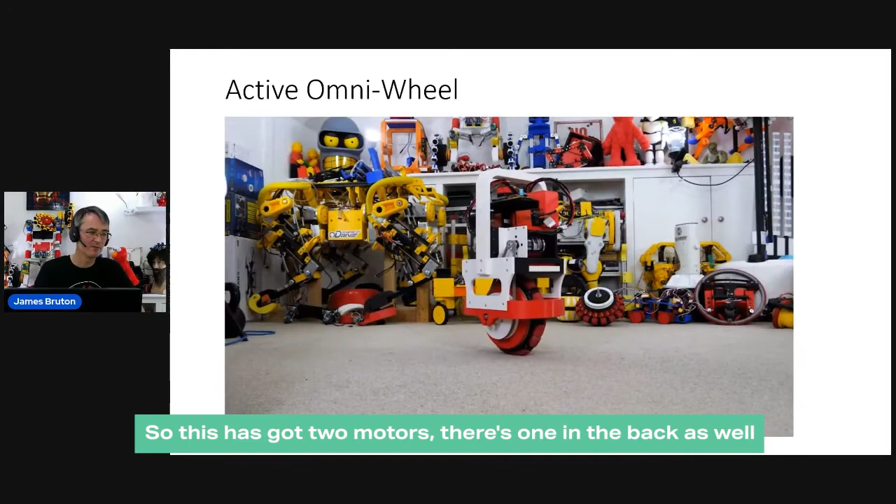So the next thing was to put it on a one-wheel balancing robot. This has got 2 motors, one in the back as well, with 2 drive belts down to each side. They both turn in the same direction, so it goes forward and backwards. And if you add or subtract the sideways motion from the main motion, it will go this way. And it looks like a funny face.

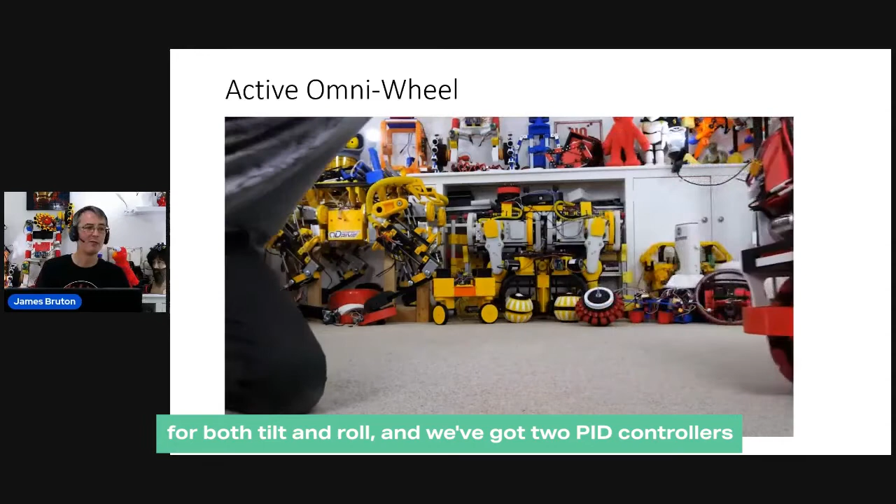So we've got 2 inertial measurement unit axes for both tilt and roll, and we've got 2 PID controllers running on a microcontroller and a 2-axis brushless motor driver. So it did an okay job of balancing.

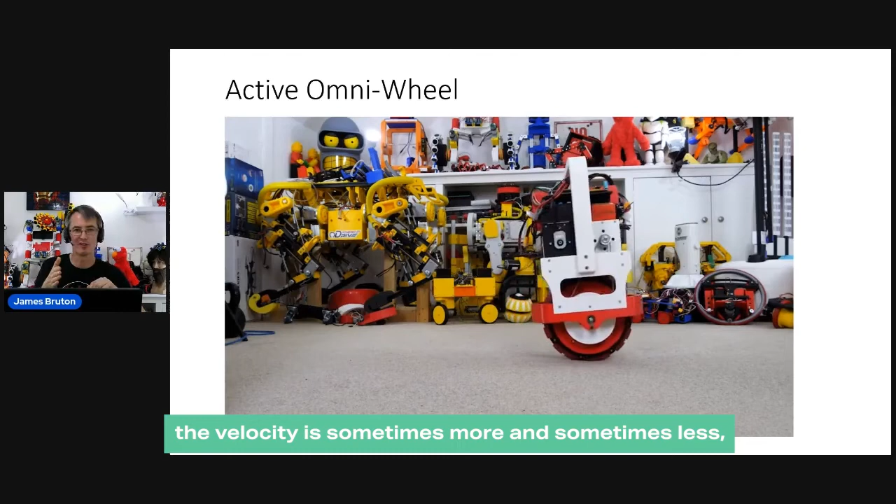The problem with this was that those little wheels are slightly tapered because they want to follow the contour of the wheel all the way around the outside so that it's round. And that means the diameter of that wheel varies from the center of the little wheel to the outside - it gets smaller. That means the circumference is smaller, which means that when it runs sideways, the velocity is sometimes more and sometimes less, depending on the position of the wheel in its main axes. So sometimes it's not quite as good at balancing, depending on where it is front to back.

We could compensate for this by looking at the motor encoder for the front-to-back axes, and then dynamically changing the side-to-side output velocity, but I didn't bother doing that. So it kind of works, it proves the principle, and I was fairly happy with that for a 1-week video.

So what's next for the channel? I talked about how I used to do pop culture stuff, and then I did more serious robotics. Yeah, the plan is to make everything I made in the last year or so, but make it bigger.

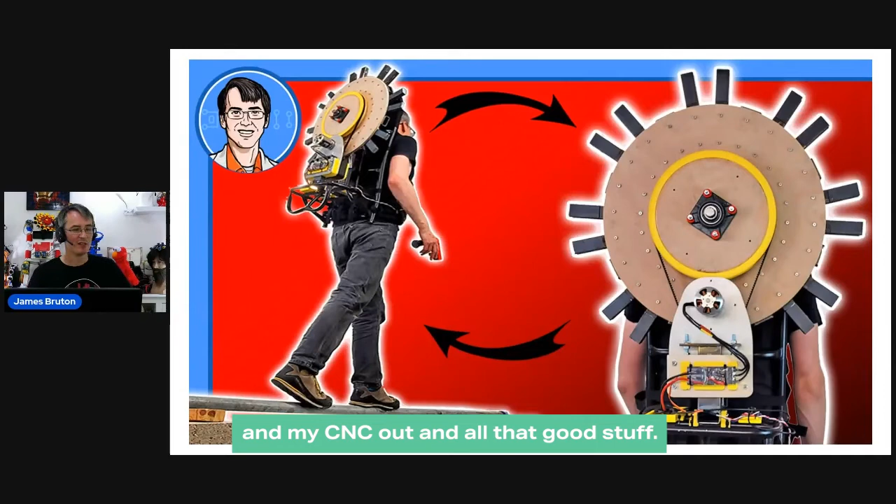So I rented a 1,000 square foot workshop where I can get my welder and my CNC out and all that good stuff. I've had it 2 months. I've done quite a lot of projects there.

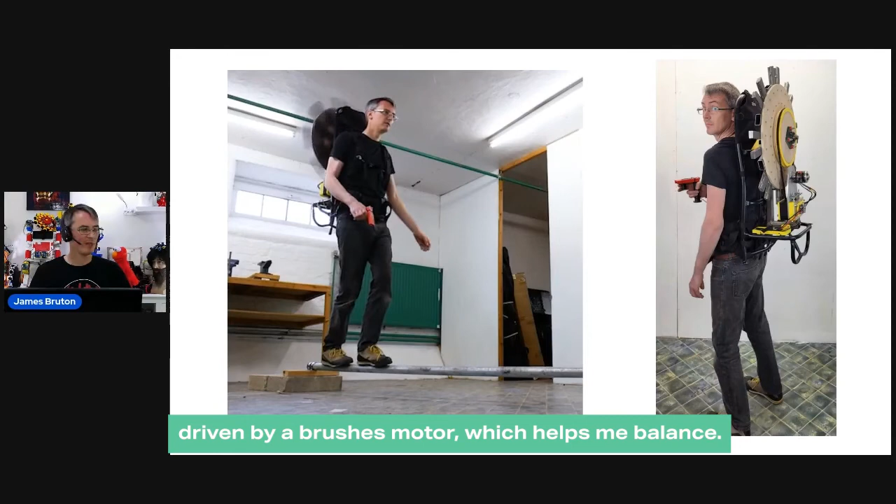The most recent one that got published is a wearable reaction wheel. So this is a backpack with a lot of steel on a reaction wheel driven by a brushless motor, which helps me balance. The little reaction wheel did about 150k on YouTube. This one's done like 450k because it's crazy and people like that sort of thing.

So yeah, it helps me balance on a beam. It does actually help me. There's a certain technique to walking because there's not quite enough mass or enough reaction. But if I walk and I push off the reaction, like people are helping me each side, then I can walk across fairly confidently.

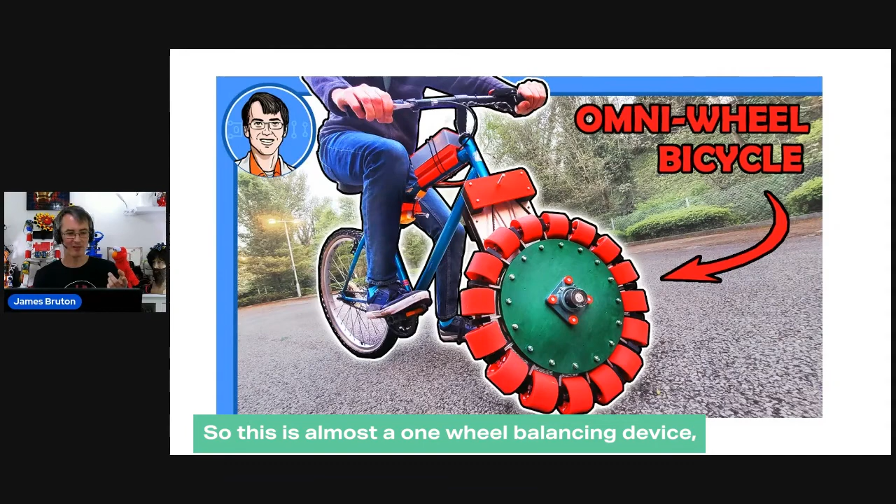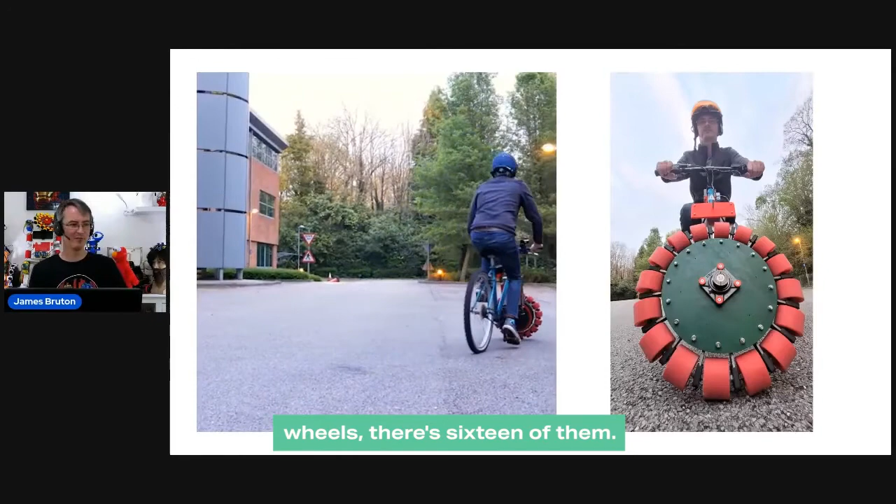The Omni wheel bicycle - this is almost a one-wheel balancing device, but only my Omni wheel's passive because I've still got the pedals driving the back wheel to go forwards and backwards. So basically it balances sideways, a bit like a balancing robot, but then I can still ride like a normal bike because the Omni wheel will still slide front and back on its little wheels, which are, I think, 71mm diameter longboard wheels. There's 16 of them. And so it still rides like a normal bike.

And I can stop and turn on the balancing, just about. You'll see a little kick there - that's where the integral kicks in, which goes, well, hey, I need a massive value because that IMU's leaning over. It'll stabilize after a bit, and then the idea is I can spin round on the spot and drive off in another direction.

That video did 1.7 million views so far and counting. It was only a few weeks ago.

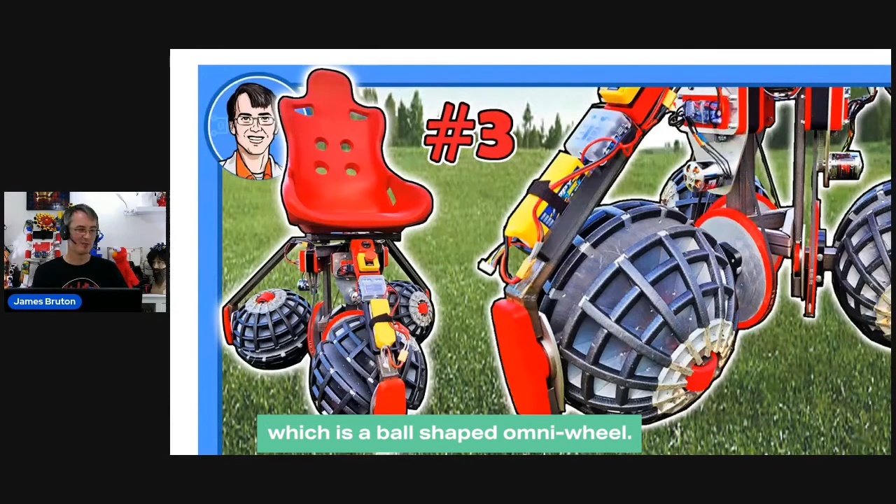This is another type of Omni wheel, which is a ball-shaped Omni wheel. Now, I didn't invent this concept either - it was Osaka University did a project, and there was a translated video on YouTube. Basically, the wheels, the hemispheres are free rolling, and they roll actively in the other axis. So basically, they're like the little wheels on an Omni wheel that are free rolling, and using a vector of all three at 120 degrees from each other, we can move in any direction.

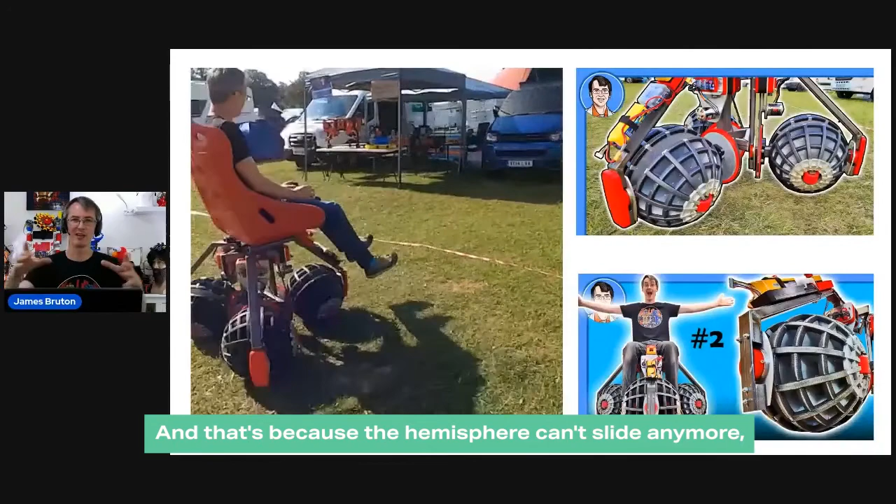The only caveat with this is that when the hemisphere rolls right onto sort of the peak - you can see there's a red wheel in there - that's because the hemisphere can't slide anymore because it won't roll unless it's on one of its edges, essentially. So there's a little skateboard wheel, which basically breaks the whole thing because it's really bad at ground clearance. It's not too bad.

This is at EMF camp. I was expecting it to just get stuck in the grass. It did pick up quite a lot of weeds, but it worked all right, I think.

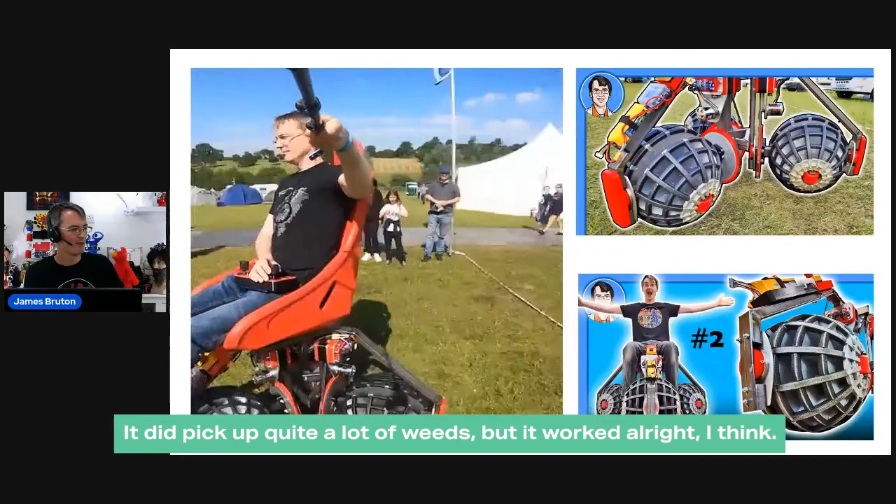And there's more projects coming up of a similar nature, basically crazy vehicles. I want to do more one wheel balancing things, a one wheel balancing thing I can ride on, and lots of other projects. As I said, I just build it for clicks, so whatever's more popular, that's what I'll do.

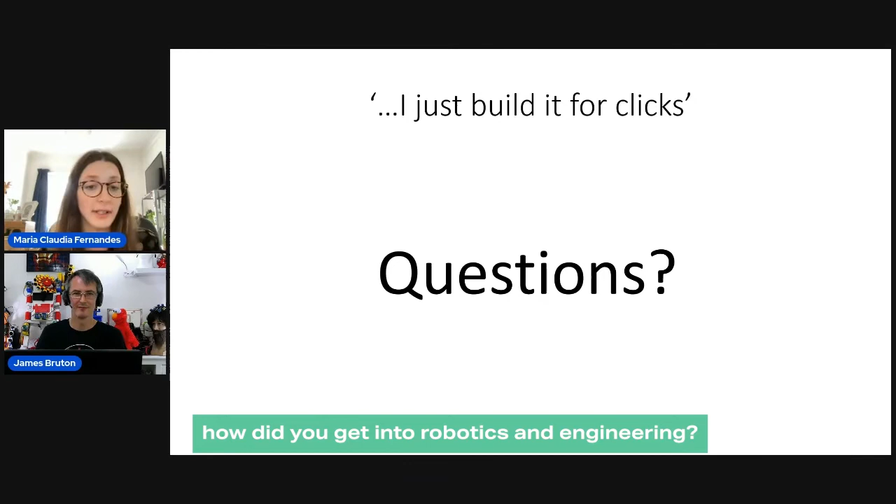Well, I've always been into making things since I was a child, I guess. There's an early picture of me with a robot made of a bit of wood and some Meccano and an egg box and some chattering teeth and some ping pong balls. It's about 2004 actually that I, as an adult, started doing robotics again. The brief history is I did electronic engineering at degree level in the 90s, and I worked in IT for pretty much 15 or something years.

I worked in the toy industry as a designer. I worked at Aon Corporation as a product architect in the IT industry doing data center hosting strategy for EMEA from 2004 to about 2015.

In that time, pretty much 3D printing became more accessible. Things like Arduinos and Raspberry Pis and all the open source stuff became more popular. Easy access to stuff, eBay's flooded with stuff from China now. And also YouTube came along.

So I started putting videos on YouTube in that time, really. And then at the end of that, I was recruited to work in a toy company to do product design based on what was in the strength of my YouTube channel.

So yeah, I sort of started making content, I guess, before YouTube in 2004, trying to do walking robots and putting them on my website, xrobots.co.uk, mostly failing until we got to the Gonk droid and things that I showed in this video. But yeah, there was another previous 7 attempts at walking robots made of much cheaper, horrible parts and wood and things that I could get in 2004, pretty much before I understood really what I was doing.

Interesting, thank you. And tell me, what inspired you to get into YouTube? Was it your passion?